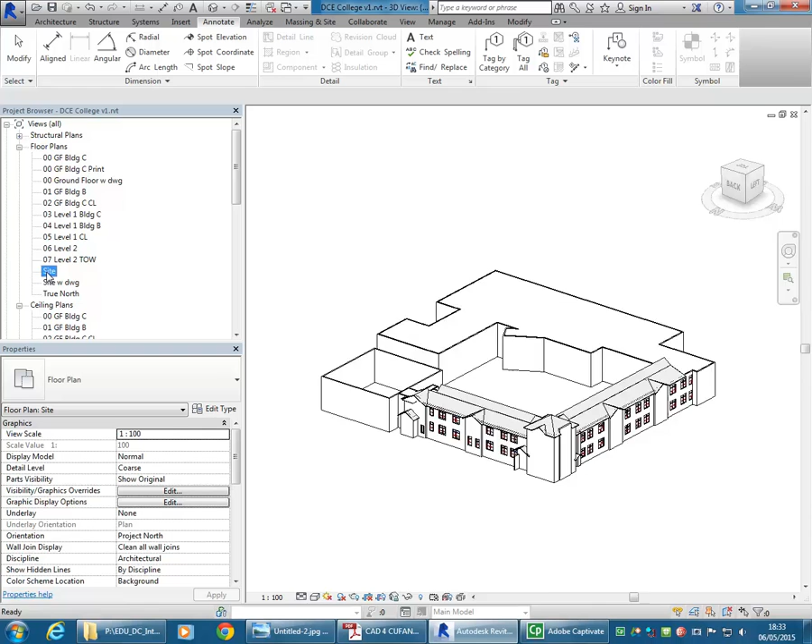So I'm just going to go quickly through a couple of things to finish off this view, like putting a topo surface in, and then I want to get into setting up the other views really quickly before getting on to more advanced things. So the building there, you can see, doesn't have a ground surface, so if you haven't done a topo surface for a while, I just want to go over the basics of using those.

It's fairly straightforward. Never used a topo surface? Okay, so that's all right. I'll cover all the main things. Yeah. Right. Yeah.

So you've got all the tools for site and topography on the massing and site tab. And then topo surface, it's actually a pretty easy one to use. Once you click on topo surface, you go into sketch mode, and it'll have this option, place point selected. If you click on something else, you just need to select that again to start creating your surfaces.

And I've inserted a drawing in here which can give me some idea of the streets, but I don't actually have the more detailed drawing, I don't think, which is fine, I don't need it. So I've just got some of the street elements at least shown there. So, like I was saying, place point is the main tool you use to create the surface. And for a project like this, it's an interiors project after all, so you don't need to do a detailed model of your site. And so, therefore, I'm going to leave the elevation there at 0.

And I'm just going to click 4 points around the building. 1, 2, 3, 4. Notice I'm in one of the site plans. If you're in a normal ground floor plan, you won't see those points always. It is coming up in some of them, but you can see in others it's not. So the best option there is to use a site plan, where you'll always see the points.

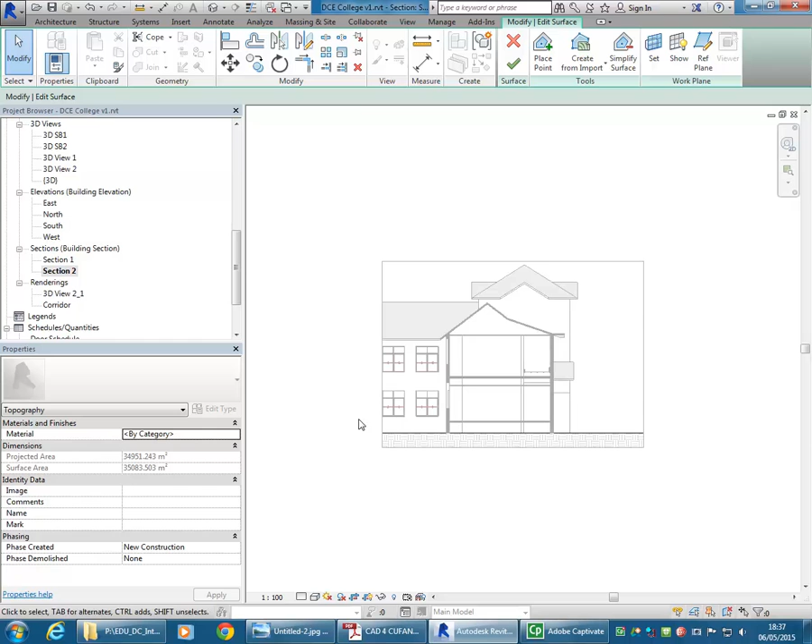So I'll show you that now in section. And because this isn't showing much of the site, I can just see a flat surface there. So I might go to an elevation there. The east or the west elevation should show me the slope pretty clearly. So we can see there these points that are higher. You can select them as well in a 3D view, but it's a little bit risky if you're not sure where your elevation view is coming from.

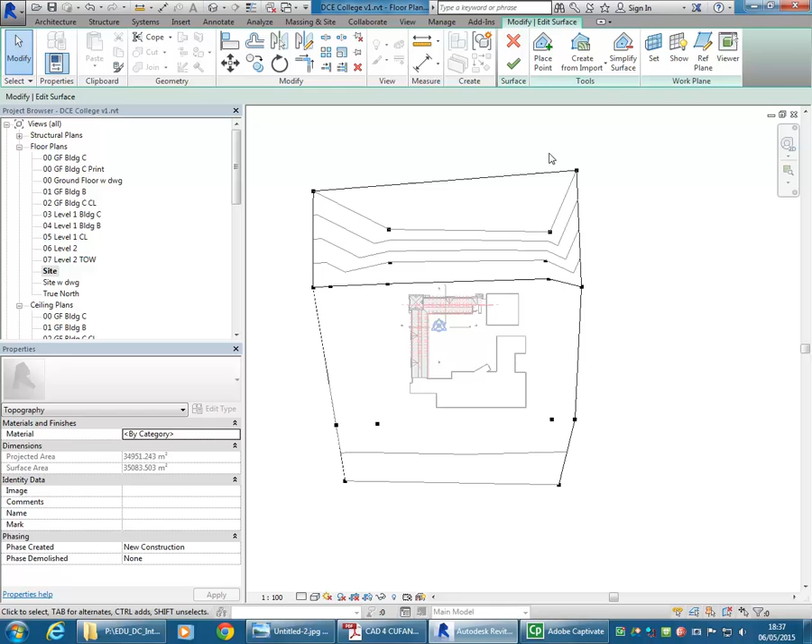So there my elevation is probably coming from about here, so it's cutting through that ground line, which is actually what I want. But I also want to move these points and make them a bit higher. So I'll finish that. And I'm going to quickly just make a new elevation view, which might be a new thing for some of you as well.

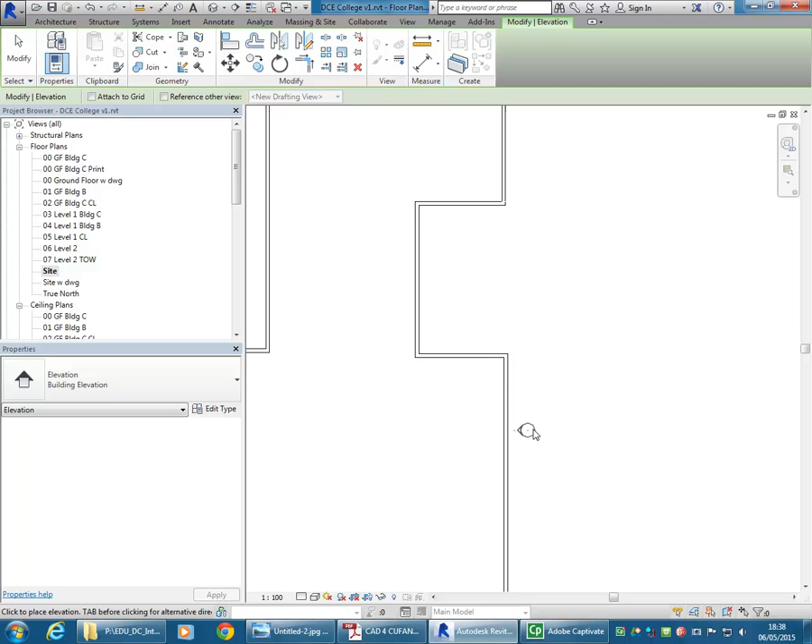On the view tab you've got elevation, and so there it's a bit hard to control the direction, it does it automatically. So it tries to point towards the walls that you've created. So I'm just going to place it off to the side here because I know it's going to point to the left.

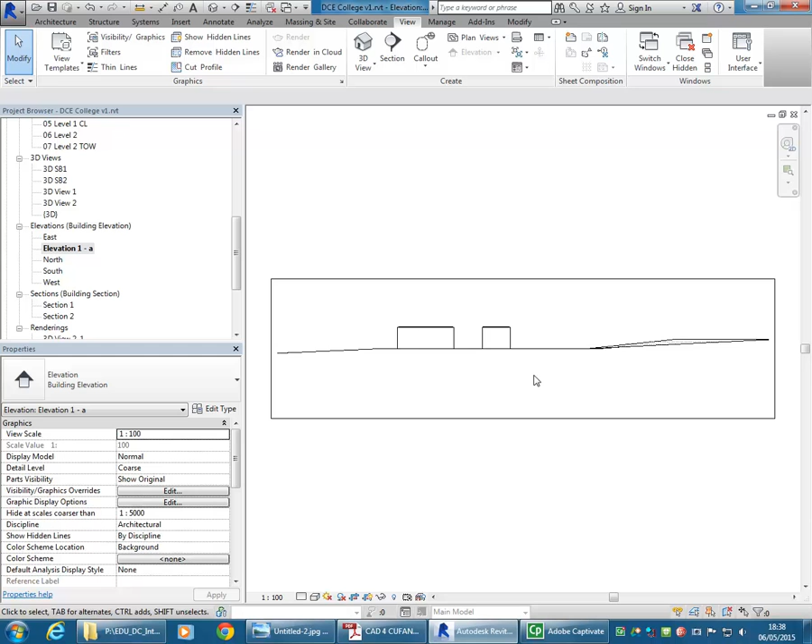And now I've got a new elevation view called Elevation 1 - a, where I can see the site from the side, or see the topo surface from the outside. I'll bring that crop region out a bit.

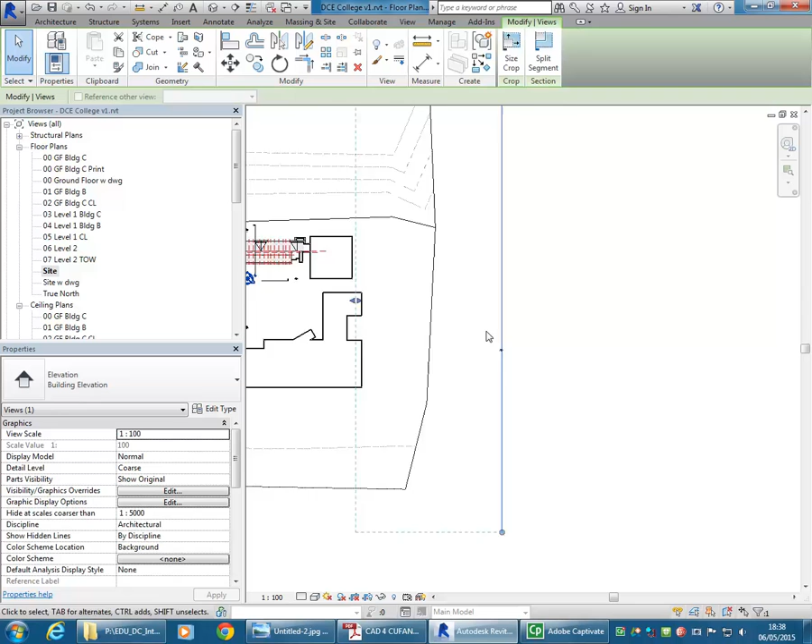And so then going back into my site plan, I'll just adjust that elevation view by selecting the arrowhead. You can see it was only showing a couple of those buildings or parts of the building because it's not going deep enough. So I'll stretch that so that it goes all the way across. Go to the view, and now I can see everything again.

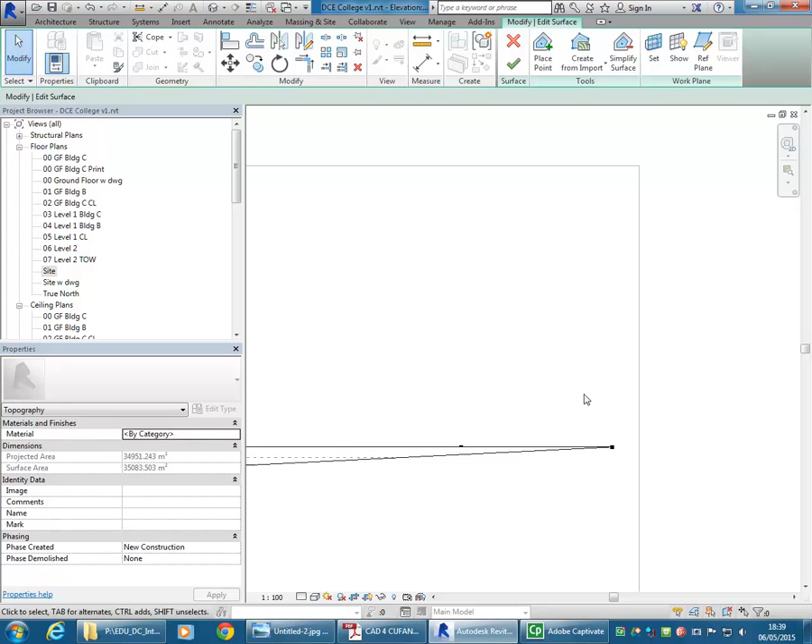And here I just want to select that topo surface, edit surface, and we can also select the points there and using the arrow keys lift them up. So you've got lots of ways of adjusting those points. And again, for a project like this, don't make it too complicated. It's an interiors project, and you're really doing that topo surface more than anything to get your nice ground line at the bottom of your views.

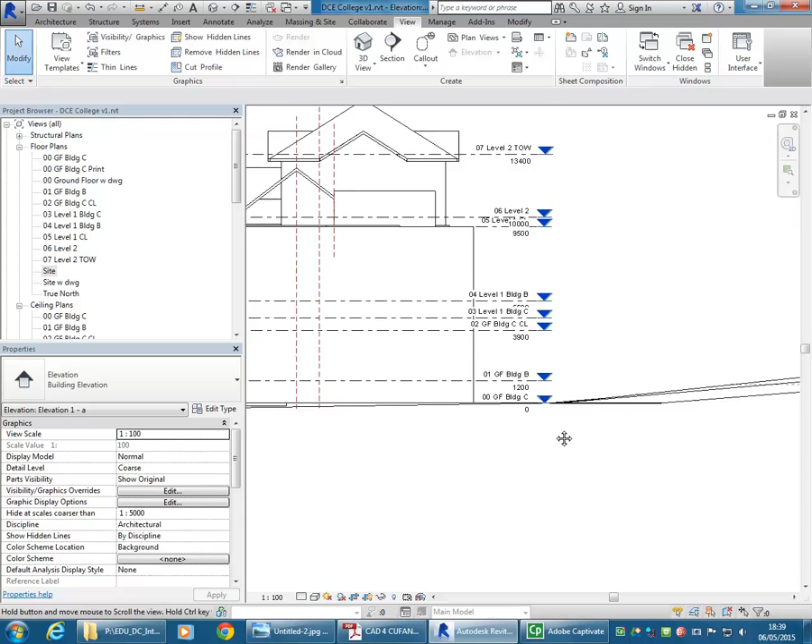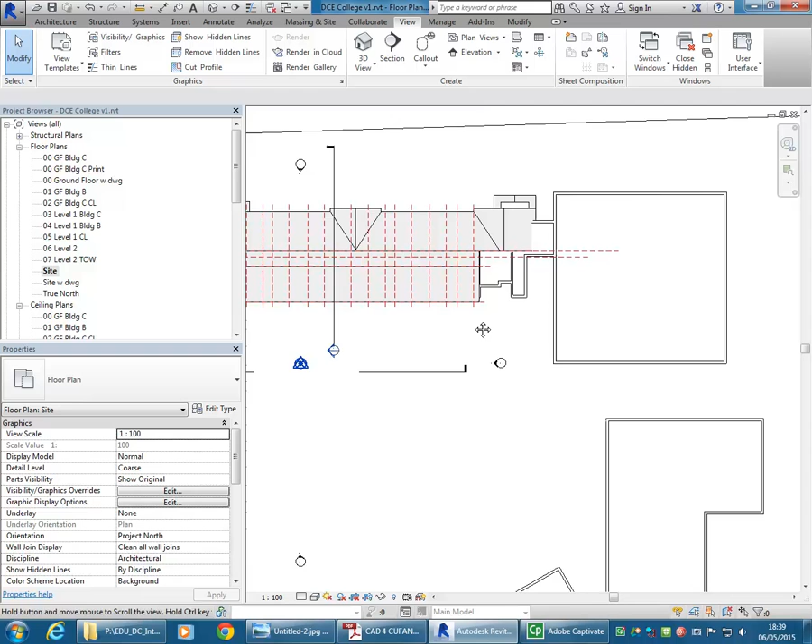So here, it's not giving me a ground line though. Well, it does in places, but mostly it's just a thin line. And that's because, again, this elevation is to one side of the building, to one side of the topo surface. Because I put the elevations where I want to show the parts that you're working on, so blocks B and C, and that's where it should be. I open that elevation. Because it's cutting through the topo surface, then I'll get a nice heavy ground line at the bottom.

So, elevation views don't always need to be cropped, but because you're just doing part of the building, you'll definitely want to crop it. So make sure you know about the cropping tools that you have available for any view in Revit. Down the bottom you've got the option to show and hide your crop region, and then the option next to that turns cropping on and off down on the view control bar.

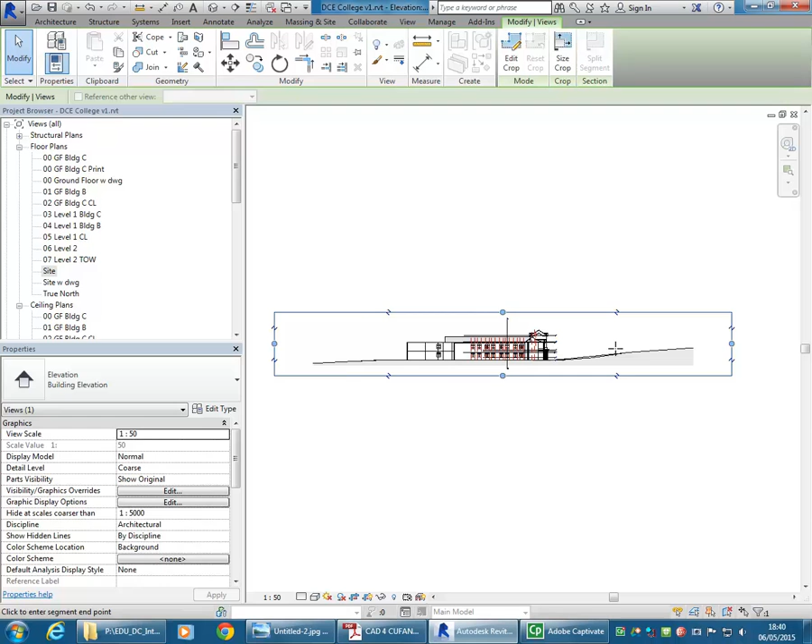So I'll bring the crop region in, just in case you haven't done much of this. And so there we don't need to show any of that part of block D. Bring this across as well.

And then just to maybe illustrate that second option there that turns the cropping on and off, that's a lot clearer now. You can see when you turn cropping on and off, it doesn't remove the crop region. And that's a really useful option. Sometimes you just want to disable it temporarily so you can access things that are outside the crop region. Then turn it back on to crop the view again.

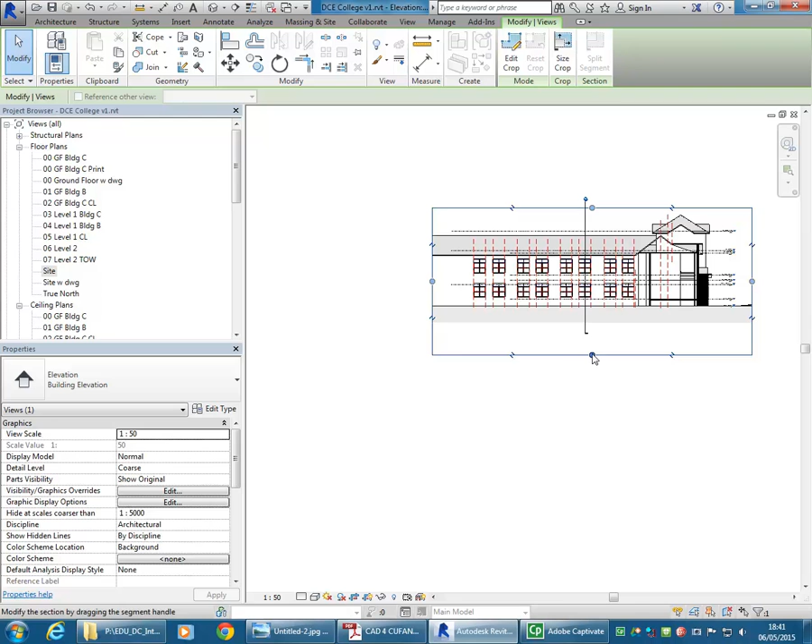And then you've got the option to hide the crop region, which again is really useful because you don't want to see that crop region usually once you're done with it. I'll hide the section view. It's good just to keep tidying your views up as you work in them.

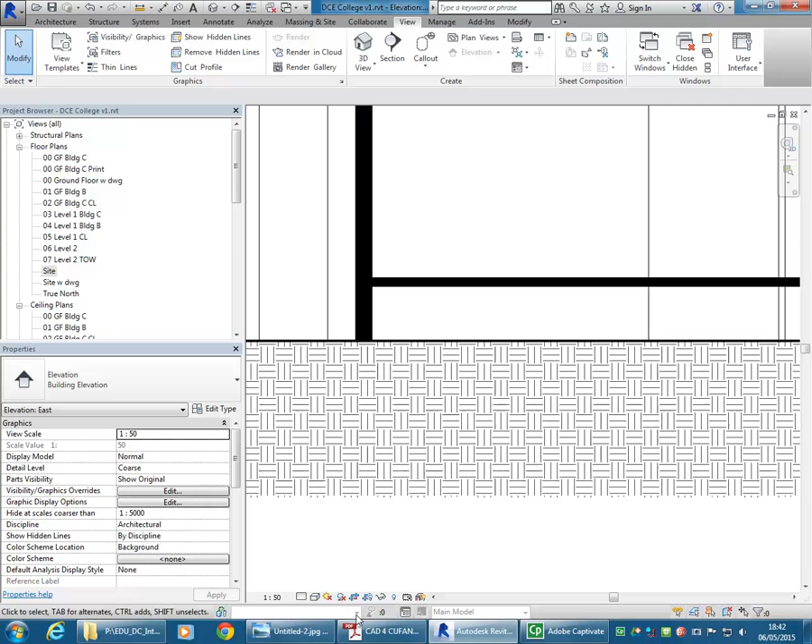And so even though you don't have to do elevations for this project, I just wanted to show you how to get the ground line to show properly in an elevation view. So I'll just bring that crop region over a little bit. So in your section, that's how you'd want the crop region, so the ground surface to show. Maybe with the cropping not quite so low, so coming up. Okay, but you'd want the ground hatch to show below your ground line to indicate that it's a section view.

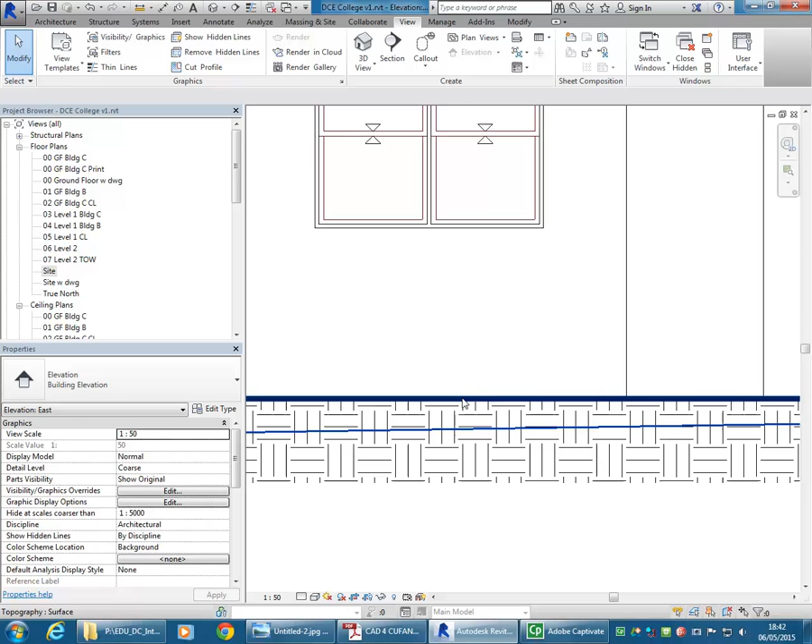But how do you show it in an elevation view? Do you show the ground hatch in an elevation view? Anyone? No, definitely not. That's right. It is sort of cutting it, but you don't want to indicate that it's been cut. So yeah, you definitely don't want to show it. And so you can use that same trick I was just showing you a little while ago. Select it, right-click, and then go to Override Graphics in View.

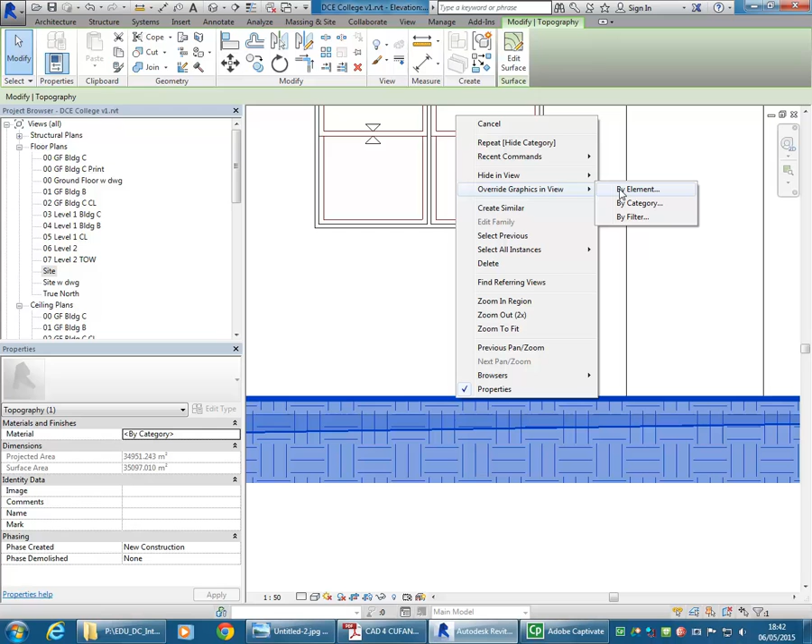And so, like I was saying, I encourage you to experiment with the options you have here to override graphics. I'm just going to show you a couple now, or one in particular. So choosing by element there. Now I'm going to go to cut pattern and just disable it. Okay, and there, that's got rid of the ground hatch.

So that's basically an elevation view, even though it is cutting through part of the building. There's not much we can do to avoid that, because otherwise you'd have to show the other building, which would hide the things you're trying to show.

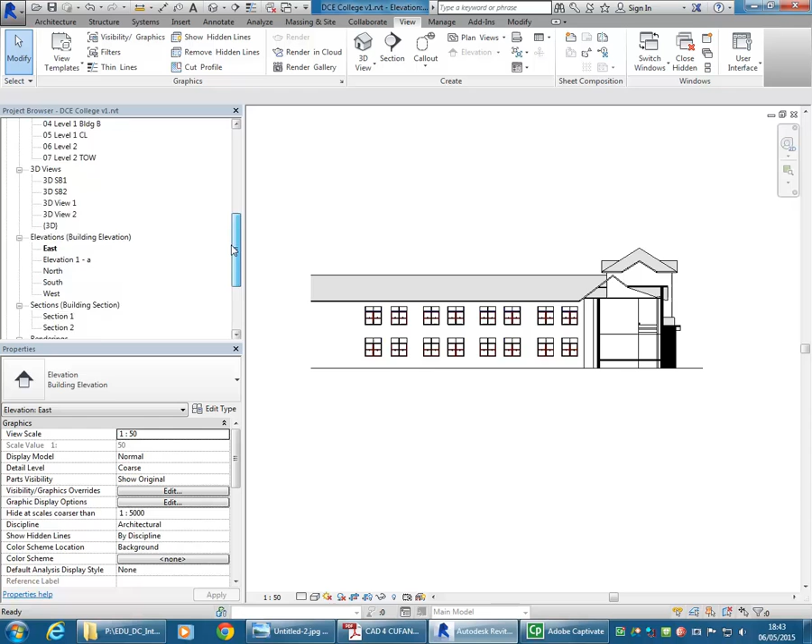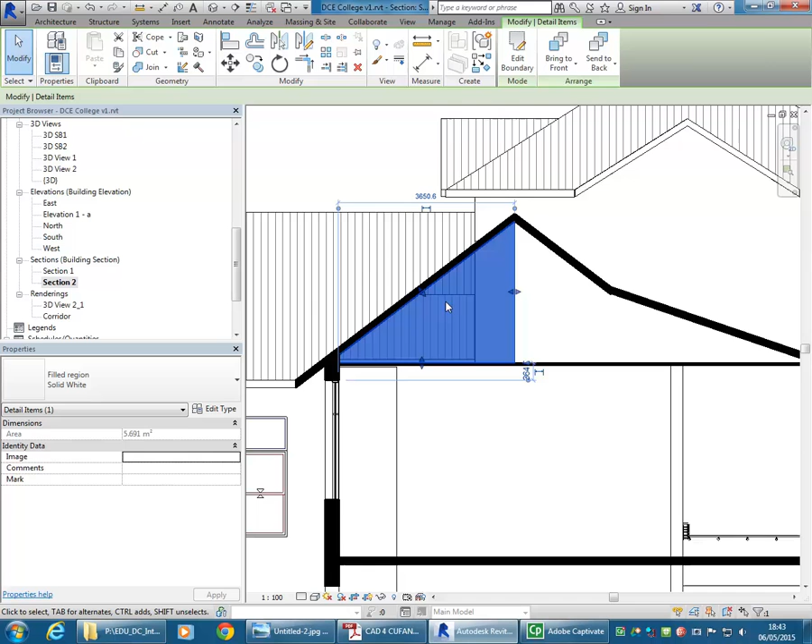So the section, on the other hand, so I'll use section 2, that's the one I want. I've already tidied that up, so I'm not going to go right into it now, but if you remember earlier I was just showing you, you can use things like filled regions if you've totally forgotten how to cover up things like the roof there, and then also detail lines to draw in anything that's missing from your drawing that you don't want to model in 3D.

And of course, don't forget about hiding things when they don't look right, and again, that's really helpful. That ceiling needs to be a bit higher.

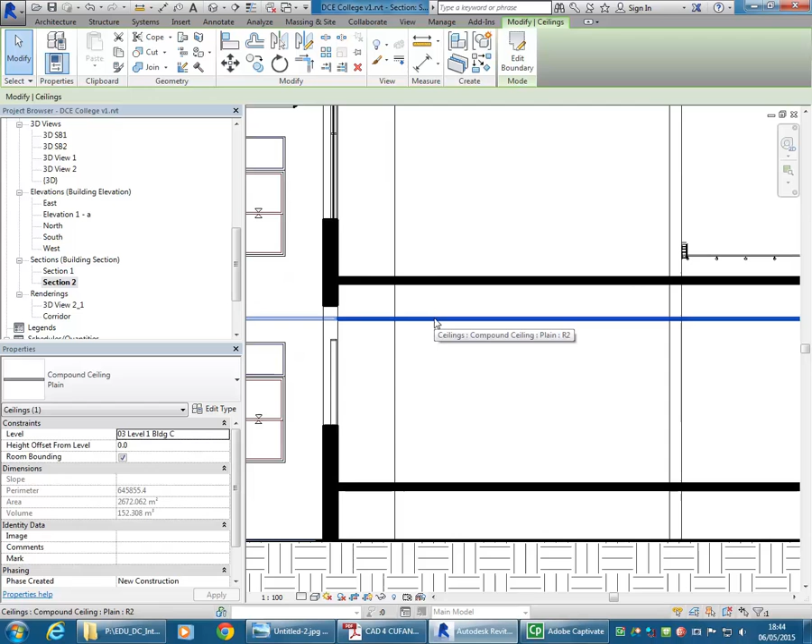And so then the section views and the plan views, like this one, are all that's required for the first project where you're showing the existing building. So floor plans of each level, so both levels, just one section. Basic labelling, so I'll maybe touch on that in a minute. Scale, and all of those views should be at a scale. I'm sure you all know by now, you set the scale in the view control bar, you've got the option there to choose a scale.

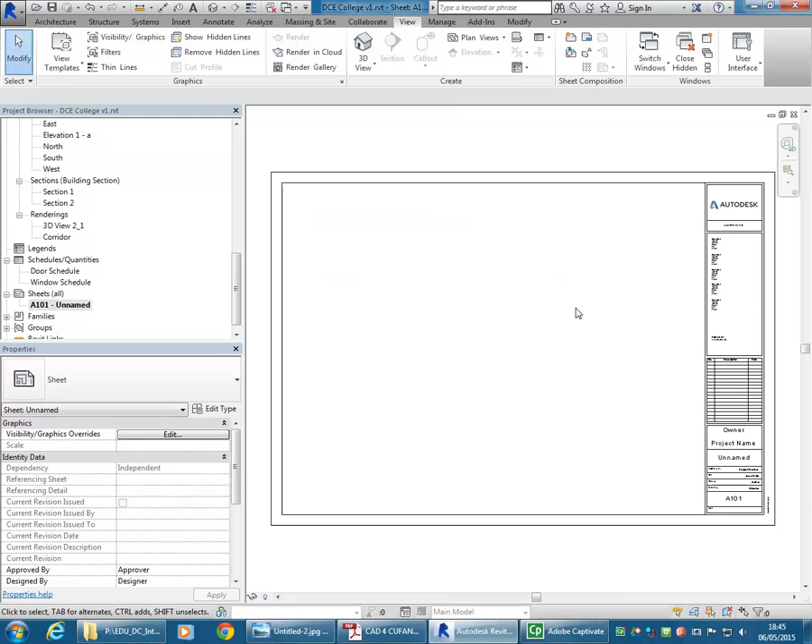So, looking at a sheet, you've got the built-in sheets that you'll have in any project that you start in Revit that have the horrible Autodesk logo. Well, it's not horrible, but you don't want to see that. So I'm going to delete that sheet, and I'm going to go and make a new sheet and use load to get a sheet from the library we have on the P drive. So does anyone not know how to get there? No? So I won't show you how to get there. It's the one on the P drive. If you haven't got a shortcut, just browse to it manually.

And there in the title blocks folder, if you haven't looked there, you've got really useful title blocks that I've made for you, like these blank pages. If you don't want a title block at all, they're really useful just to give you an idea of the paper size and how big your view is going to be on that particular page size. And that can be helpful if you then want to do the final setup of your pages in InDesign or Photoshop or Illustrator, because then you can establish the size of your views at different scales relative to a page size. So that's a useful option.

But I'm going to use one that has a title block, because you need to have that for this project, and it's fine for this project just to do them with Revit. So I didn't nominate a page size there. You can use any page size you like, and I didn't even nominate a scale. So you could do A3 if you really want to, but I'd probably go for a bigger page size. It'll give you more room to work with. And so A2 I think would be a good page size. So I've got A2 landscape below there.

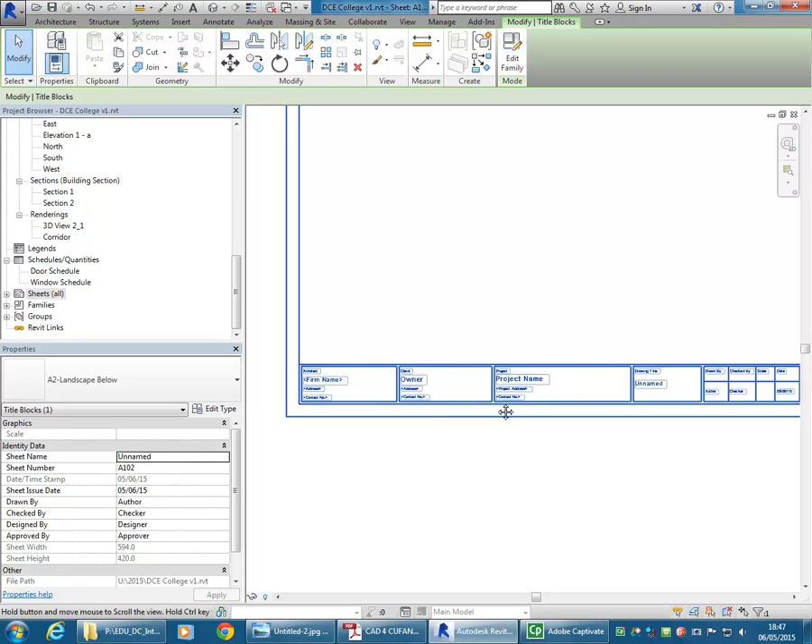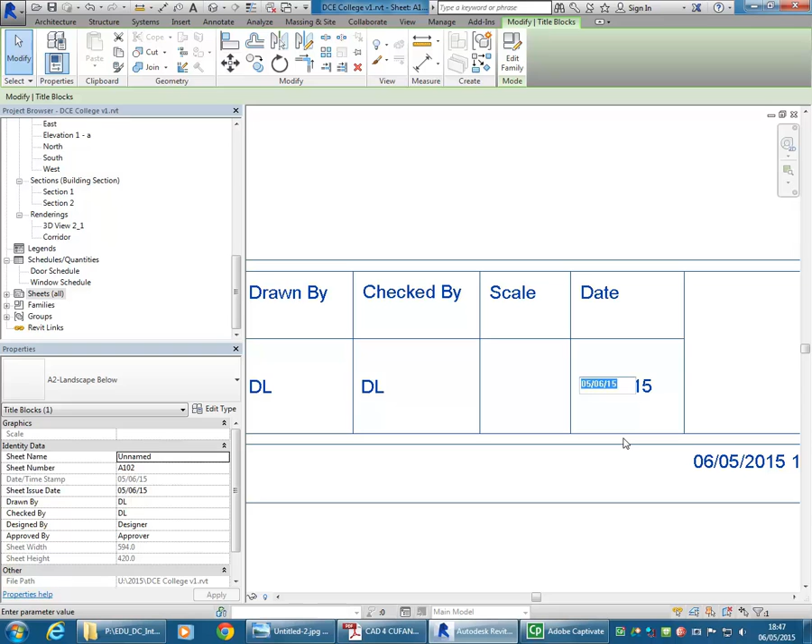And so if you haven't used title blocks very much in Revit, it's really down to the person who's made the title block, and you need to then experiment and see which fields the person who made it has made adjustable. So here I can adjust this drawn by field. Just put my initials, checked by, well that'll be me as well, and the date. This one isn't an automatic date, so you'd have to type it in, but it's come up with today's date anyway, so that's okay. And the page number is another adjustable one, so that's one that we can just type in.

But I know this title block, the drawing title as well is adjustable, so I might call this floor plans. The project name is also adjustable. So let's just put DCE block B and C. But then things like the project address and the contact number aren't adjustable with this particular title block.

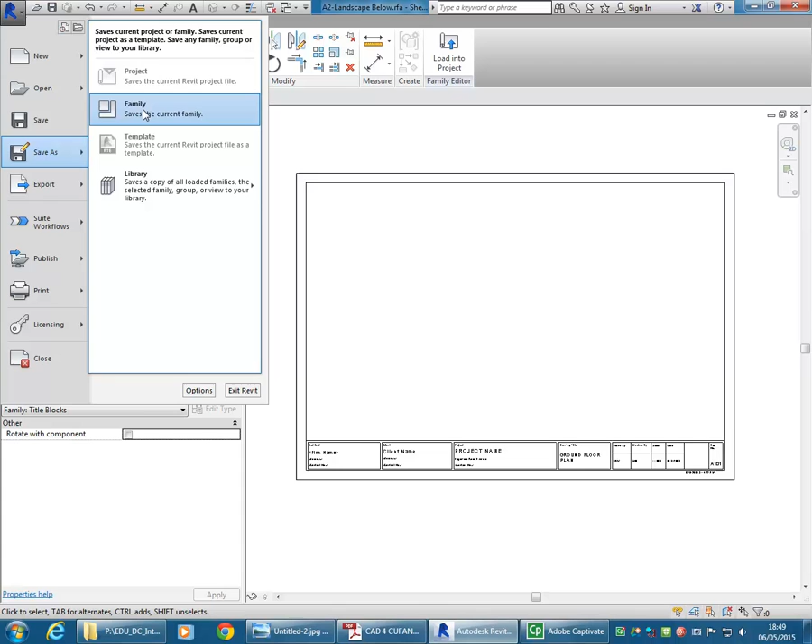So then if you make changes to this title block family, you'll need to save that as a new family. You don't have to give it a different name, you just need to save it into a different folder. It's a good trick to leave the same name so that when you load it back into your project, it's going to just give you the option to overwrite the existing version.

And there we go, it's changed my title block, and I can go and do the same to change all those other properties. And now I want to start putting the views onto these sheets. So I'm going to drag across my floor plan. Oh, there's nothing. No. So then you can see, as I was saying, how big this view is on that page size. And that's a really useful thing to have, obviously, when you're setting up your pages like we are now to finish the first project, but also when you start working on your design.

I'd actually do this before you've done very much design work at all, because then you have a good idea how the views can be set out as you're doing your design, which is going to give you a good idea how much you need to draw. And you'll see when we go and do the perspectives, that's extremely useful. So I've deleted that view because it was too big. You can resize it on the page, but a really good tip I can give you there is to do as much as you can in the view before you put it on the page.

So there, I've changed it to 1 to 200. Notice that the section lines disappeared. Anyone got any idea why that's happening when I change the scale? Something you might have noticed if you've ever gone to 1 to 200. So it's one of those not very well known options actually with sections. They have an option in the section itself. So if you select a section, you'll see it's got the option to hide at scales coarser than. So there it's going to hide at scales coarser than 1 to 100.

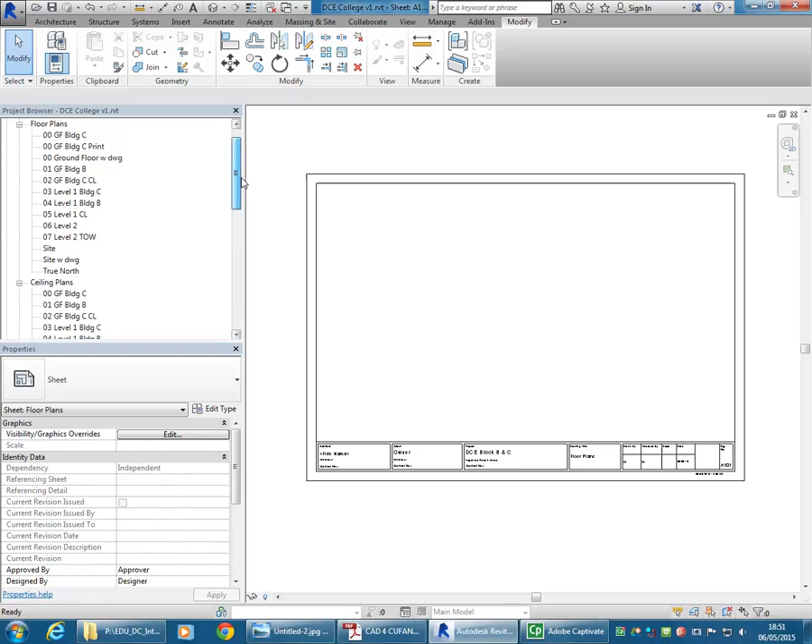Now I want to see it at 1 to 200, so I'm going to change that to hide at scales coarser than 1 to 200. Now if I change the scale to 1 to 200, it won't hide that section. It's hidden the other one, and that's good because I don't want the other one. So then in the page, or the sheet, I can now drag that on and it will easily fit. And notice it's resized the label to suit.

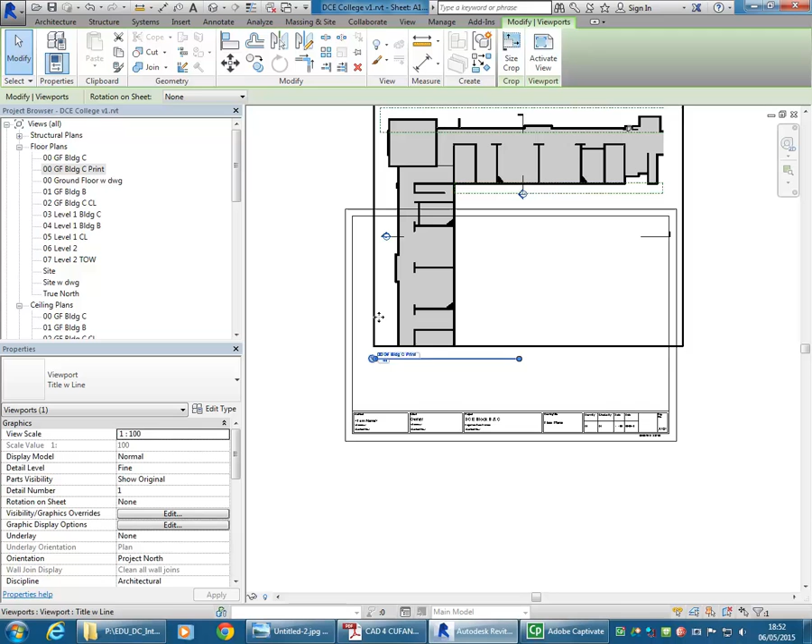Whereas if I'd done it the other way, if I changed the scale on the page, the view changes size. So I'm just looking at A2. Yeah. And so notice it changes the scale of the drawing or the view, but the tag would need to be resized manually. So that's just a simple thing you can do to get your tags automatically the right size.

So what was that? Oh yes, of course. Yeah, absolutely. So I'll show you that. So if you select the title block on the sheet, and then go to Edit Type, then you can go to Load, and load a different title block that way. So you can load in a new page size, and it's best to have the page sizes already set up in families. So yeah, that's the best way to change it, because it gets the print size from the title block size.

Yep. Yeah. So then you'd have to select it and then use that same option, go to Edit Type, and then you'll have it in the list here of title block families to choose from. So because I've got this A0 page, I can just switch to that straight away.

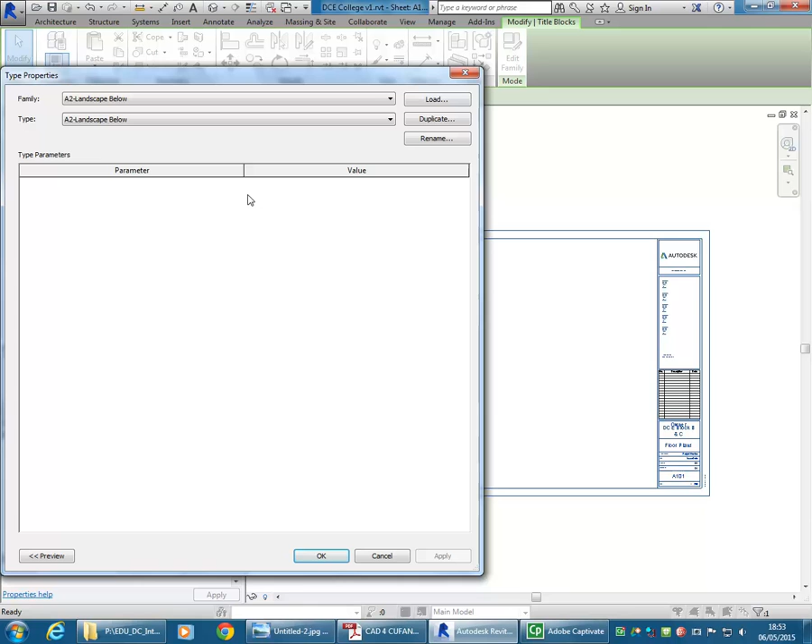Right, I can try, but they've changed the proxy, the way that we access the internet in here. It goes via a server, and it's causing all sorts of problems with things other than just standard browsing. So I'll have a look at it later and see if there's a way. Because I've made it work because I use Dropbox too, but I know it's a bit fiddly.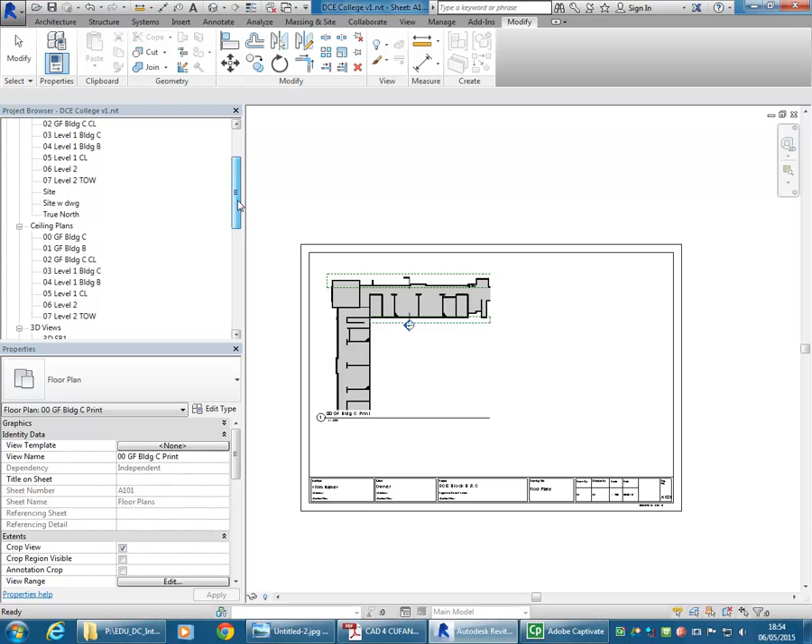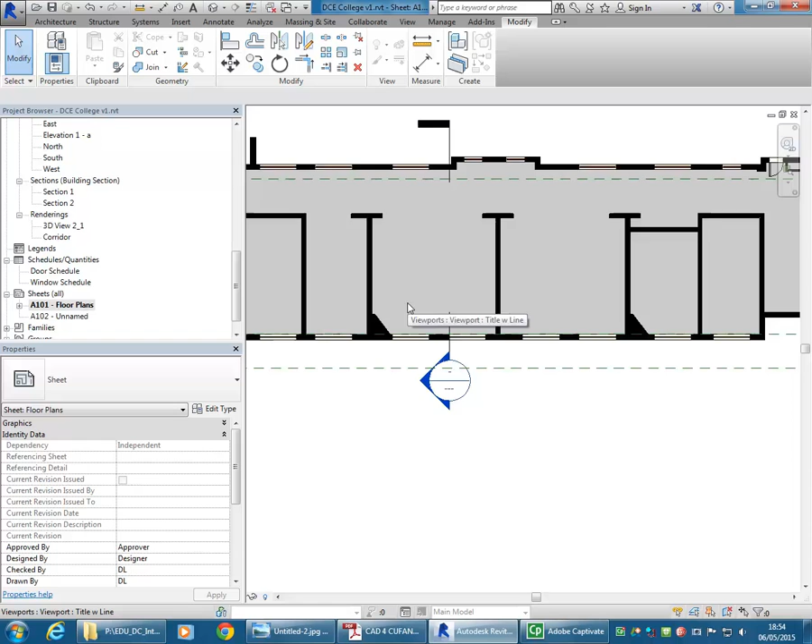Okay, so you should be able to fit both floor plans on there. So I'll make a new sheet. Okay, so I just wanted to remind you there with the section view, how you get the referencing. So I might just delete that just to illustrate what's happened there. So if you've seen in your section labels that it just has these dashes and you've wanted to change those to a set of numbers to reference the views,

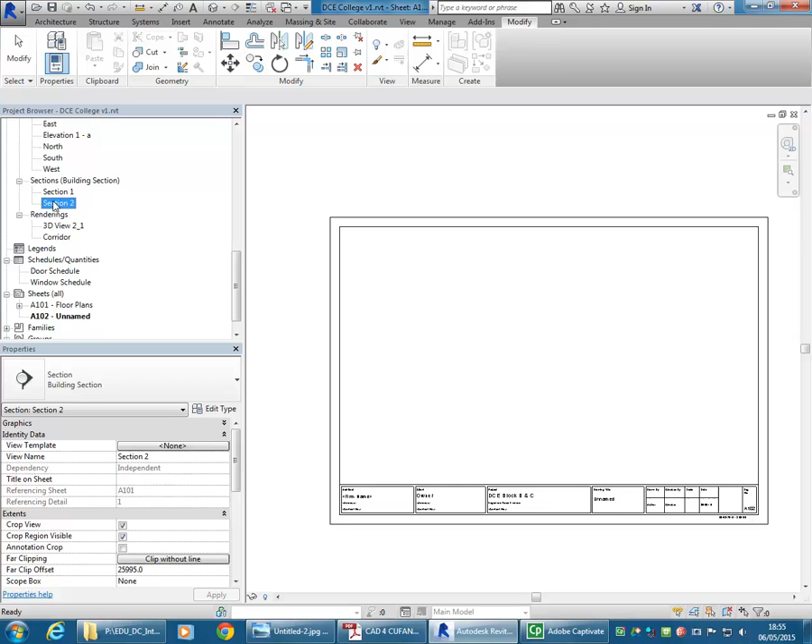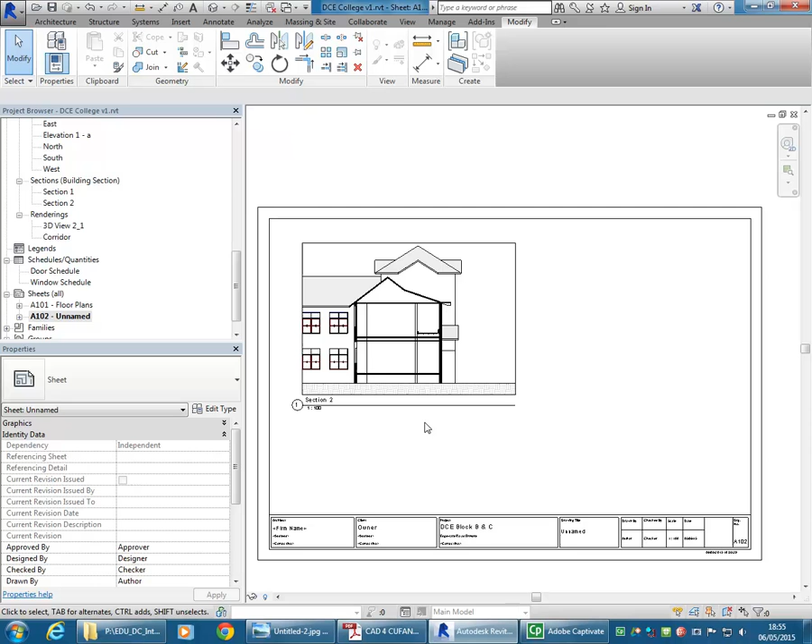notice when you put the view that it's referencing onto a sheet, so this is section 2, then if I go back to look at the floor plan now, it's automatically got the referencing there. Okay, so that's something that can trip you up, but if you know about referencing, it's much easier than doing it manually, and Revit will automatically update the references. So if this changes to view number 2 on the page, automatically back on the floor plan, that's going to update.

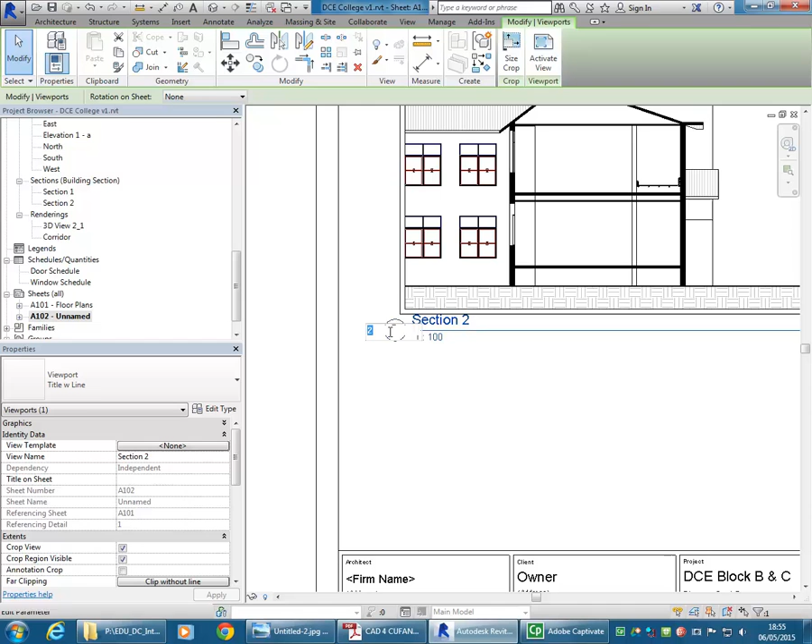Yeah, exactly, and then you can just change that number there. So I'll change it back to 1, and then that's changed. Okay, so just a couple of other things maybe with viewports. When you select a viewport, you can easily move them around, and it moves the tag with it. It is, yeah. Well, it's just getting used to selecting them separately, yeah, because... Yeah, you have to move the whole thing to move the label.

That's right. So to move the whole viewport or to change the size of that tag, you select the viewport. But then to just move the label, you've got to deselect everything and then click on just the label, and you can move it separately. So make sure you're aware of that, and it works pretty well. Sorry? Yes. Yeah.

Yeah. So, well, the best option is to set the viewport to no title in properties, and we'll just turn that off altogether. Okay. So that's a bit tricky. What you'd have to do is make your own title tag. That's a family, and you can do that. They're in the annotation folder. You'll see you can easily make your own, but it's a bit technical. And so probably an easier option is just to set it to no title, and then just draw on with text on the Annotate tab. You can use the text tool and just draw in the text you want.

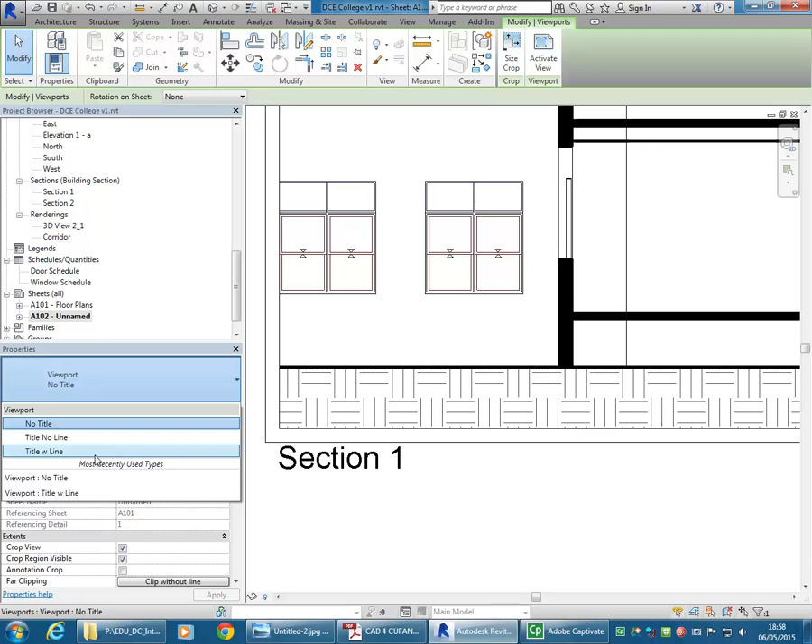So we want that to be bigger text, obviously. And, sorry, let's do that again. So that's sometimes quicker and easier than trying to make a new tag. Such a fiddly thing though. Yeah. Because, like I said, you can definitely make your own tags, but it's a bit more technical than making other families. But I'll delete that and go back to having it.

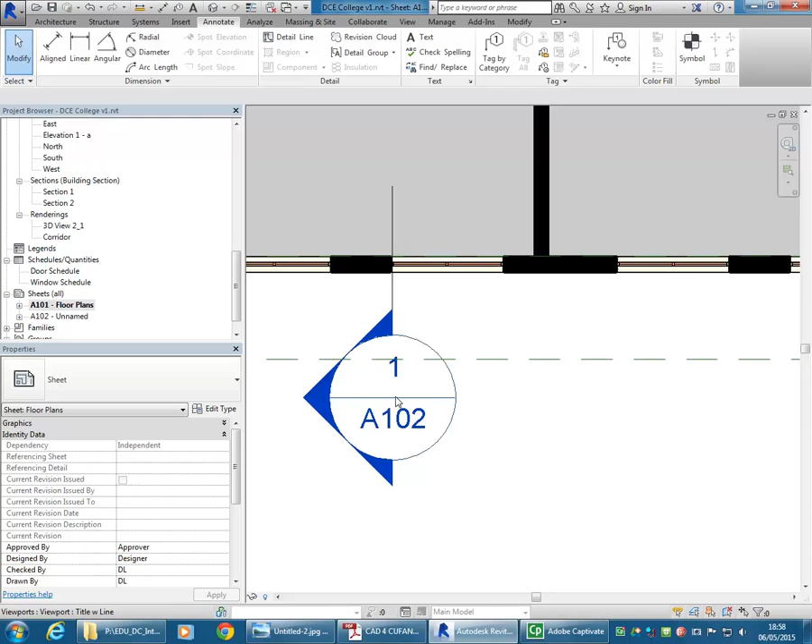So the main thing I really wanted to point out there is the way you're getting that size. And just remind you, it's using the scale to give you the size of the orthographic or the orthogonal views. So plans, sections, elevations, and also, even though you don't need to do them for this project, axonometric views. So you definitely by this stage would have done a lot of axonometric views, I'd be assuming. So 3D views that aren't in perspective.

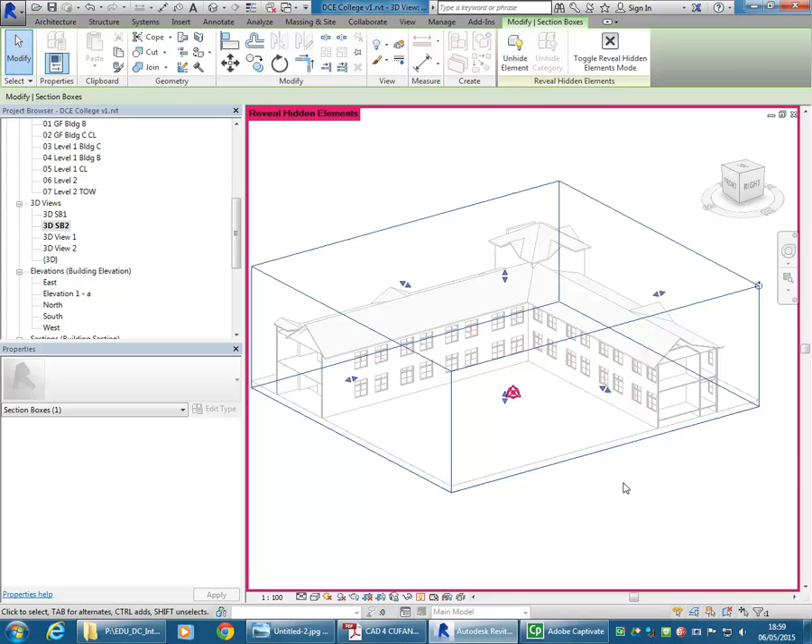Yeah, we've got to do them. Yeah, you would have drawn them even by hand, I'm sure. Yeah, they're actually the way I design by hand. I do all my hand drawing in axo. That's just the way I was taught to draw, so I'm just used to doing it that way. It's much easier than drawing perspectives to do design work, I find. If your plan isn't going to give you enough, they're pretty good.

And the great thing about Revit is that it does axonometrics automatically. Everything's an axonometric if it's not a perspective. So it's always got a vertical axis. And so the main idea there is that the axis in Revit is always vertical, which means it's an axonometric view, not an isometric view. But you'll see, even in the next assignment brief, I've called them isometric views because that's the term you're probably more familiar with. And do you know what an isometric view is? Because you need to do it for the next project.

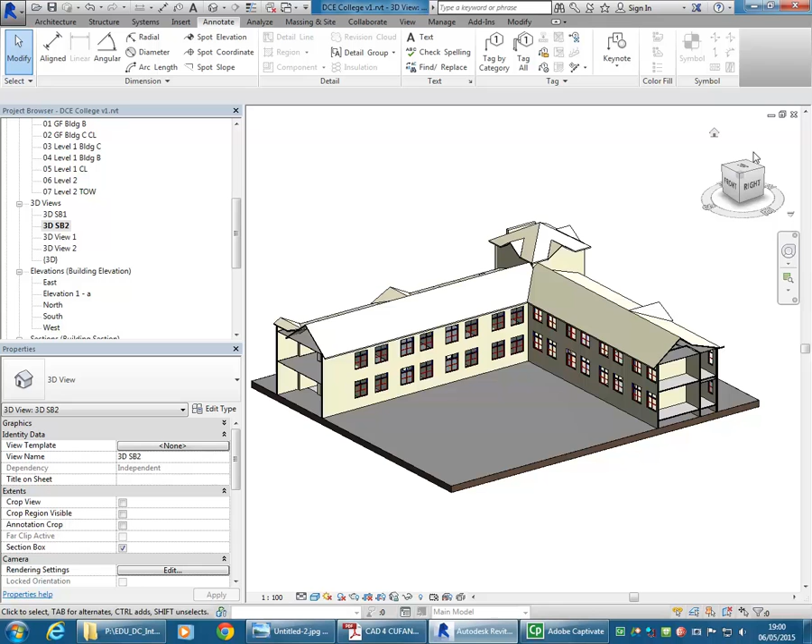Oh, I always get these. Yeah, everyone does. But it's easy if you remember what the original words mean. So iso in, I think, ancient Greek means equal. And so in an isosceles triangle, you have two equal angles. And you'll see that term come up like ortho. Ortho basically means at right angles. And so that's a true isometric view there when you click on the corners of your cube, because you have equal angles between the top, front and right sides there. So that's a nice thing again that Revit does for you.

If you want the other one where it's got 45s as opposed to 30-60. Do you use those angles 30-60 to do your isos? No? Oh, you don't do much hand drawing probably for this. Yeah, so well, they're making the first years do it now. It's coming back. A lot of it's really coming back. So it's worth looking at this stuff. Collage, watercolor, all that old stuff is really making a big comeback. And you're expected to do that as well as the computing stuff nowadays.

But I know you are lucky you just are allowed to do computing stuff for... Well, yeah, I know, that's right. Exactly. And it's the same, I mean, the uni I'm going to, they're manual drawing people, so they're making us do everything by hand, even people who can use computers. That's right, exactly. And I know he's going to be doing a lot of the design subjects from now on, so it's good to look at that.

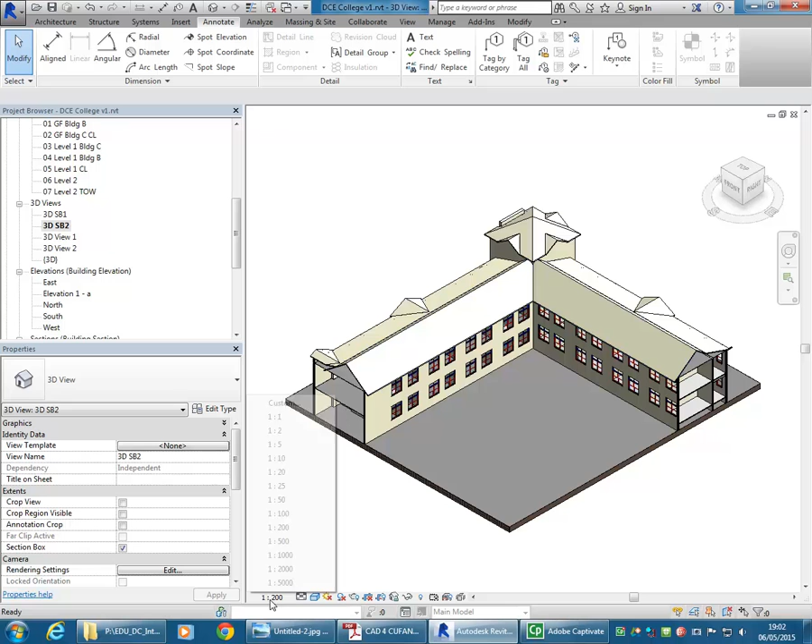So going down to my sheet now, I can place the view that I just had open, which was section box 2, onto the sheet, and I know how big it's going to be because I've set that scale 1 to 200 in advance. And it will just make it there with the section.

And then maybe just a little thing I can show you before I go into perspective views is that you can work on the sheet.

And do most of you still use AutoCAD? Yeah. Right, yeah. AutoCAD's still a great tool. I use it almost every day along with Revit. So don't forget to use AutoCAD. And for getting work, it's still probably the main program they want you to use. But Revit's a great skill as well. They're really looking for Revit people because a lot of offices are switching over and struggling to make the switch.

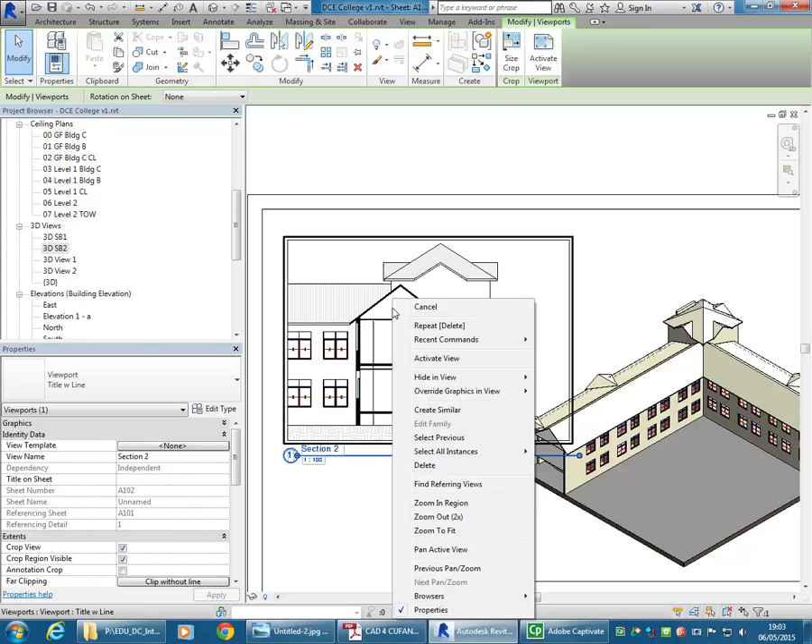So what I wanted to show you there is, if you're wondering about the option of drawing in paper space in AutoCAD and whether you can do that in Revit, you can. Select a viewport, right click and activate view, or use the option up there on the ribbon, same thing, activate view, and then it's just like switching from paper space to model space on a layout in AutoCAD. So there I can adjust that crop region.

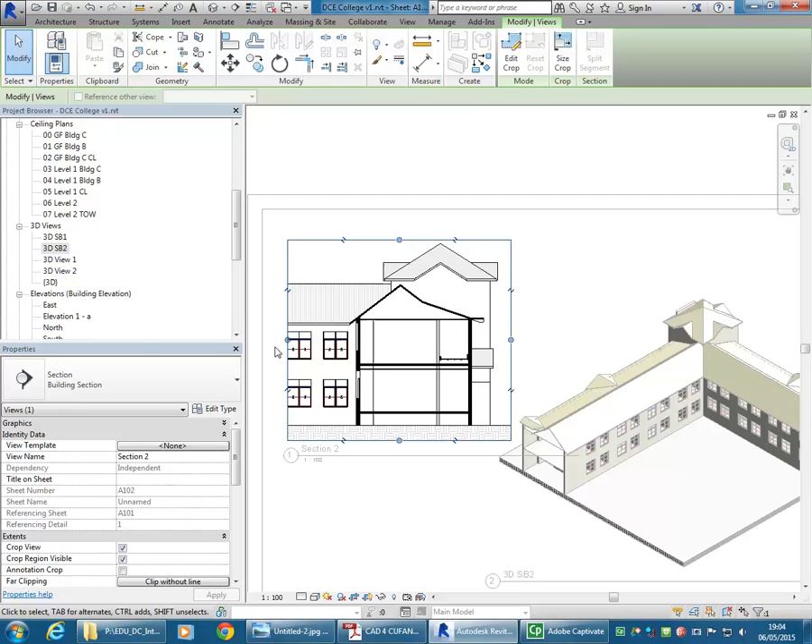So that's a really useful option as well when you want to work on a page, and obviously here it's helpful to position that in relation to the other things I have on the page. And now again I can right click and deactivate view. I'll save it. And I'm back to the page, and it's now like I'm working in paper space, and I can bring that tag over and do those other things.

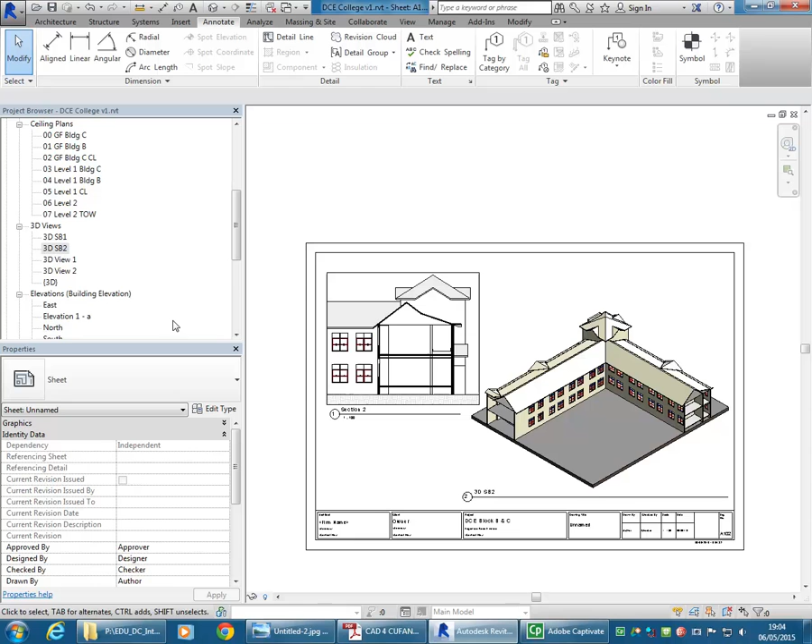So I've got a couple of views there that are at scale, but now maybe I want to have some views that are in perspective. And so the main difference there is that, well, I'll ask you, the size is set differently. So can you set a scale for perspective views? Yeah, well, you can set a size, but can you set a scale in the same way as a floor plan? No, you can't set a uniform scale, and that's the basic principle.

So sometimes there's a bit of an error in Revit, and it'll let you click on this perspective label and choose a scale, but it doesn't do anything except change the line weights. Because you can't have a uniform scale. Things in the foreground in a perspective view are always bigger than things in the background. It's obviously the same window here, but it's bigger here than it is in the background because it's perspective. So, how do you set the size for a perspective view?

Yeah, when you're on the sheet. Oh, sorry. But in here. I just select it and then the crop, that's right. Yeah, the crop region. So you click on the crop border there, and then you get size crop. Click there, and then you have this option to set a width and a height. Now, if I change the height, let's say to 100.

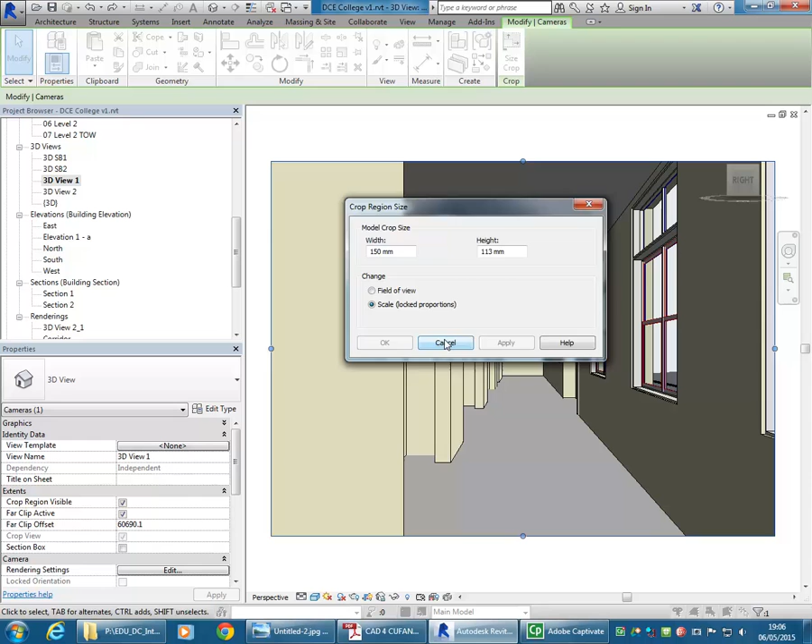So I'm going to cancel this and go to my sheet, and I'll put that view on. So it was 3D view 1. So I'll drag that onto the sheet, and now I want to make it bigger without changing what's showing inside that crop region. So notice when you select it on the sheet, you get the same option there, size crop.

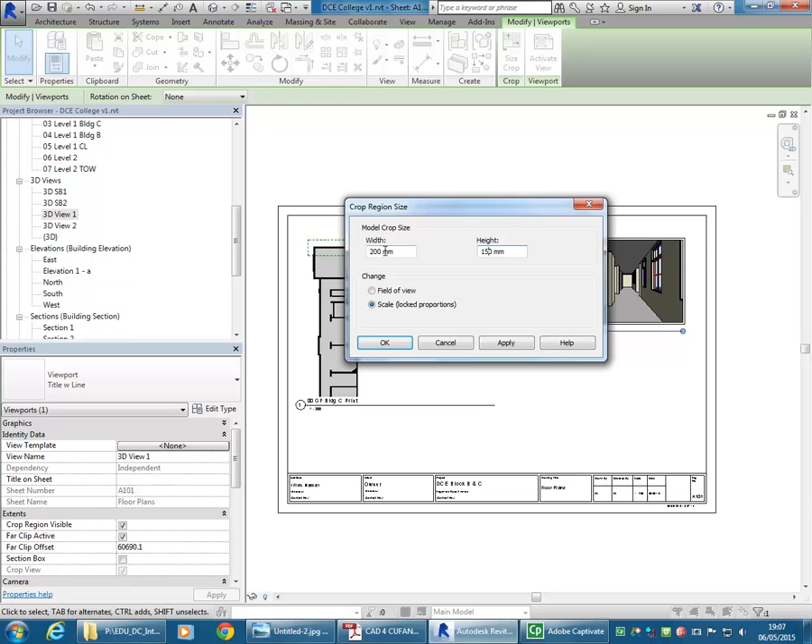And then straight to scale lock proportions, and this time I'm going to make the height bigger. I'll make it 150. I'm going to click across to the width, and notice it automatically is going to change that. So it's got the proportions locked. In other words, if you change one, the other's going to change in proportion. Click OK, and it's just changing the size of the view on the sheet effectively.

Now again here, I could select that tag and move it and stretch it, but remember that little trick I showed you? You can just delete it from the sheet, drag it on again, and it redoes that for you automatically. Oops.

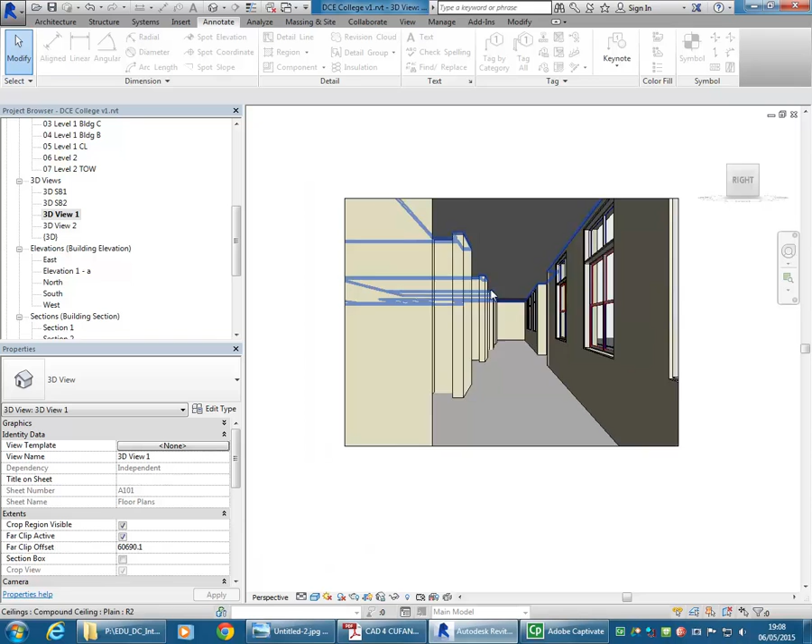Okay, so exactly the same principles apply with rendering. And it really does tie into rendering on a deeper level as well. So I've just opened that view up again so I can show you the render dialog box. I think I've shown you this before, but I just wanted to remind you, if you've wondered how it gets this size here in pixels, and this is the reason I was talking about the presentation subjects before,

because with Jane you would have done resolutions for different sheet sizes and your print resolution. So do you know what print resolution is, or should be? Exactly, yes. 300 these days is standard. You don't want to do anything less than 300 nowadays.

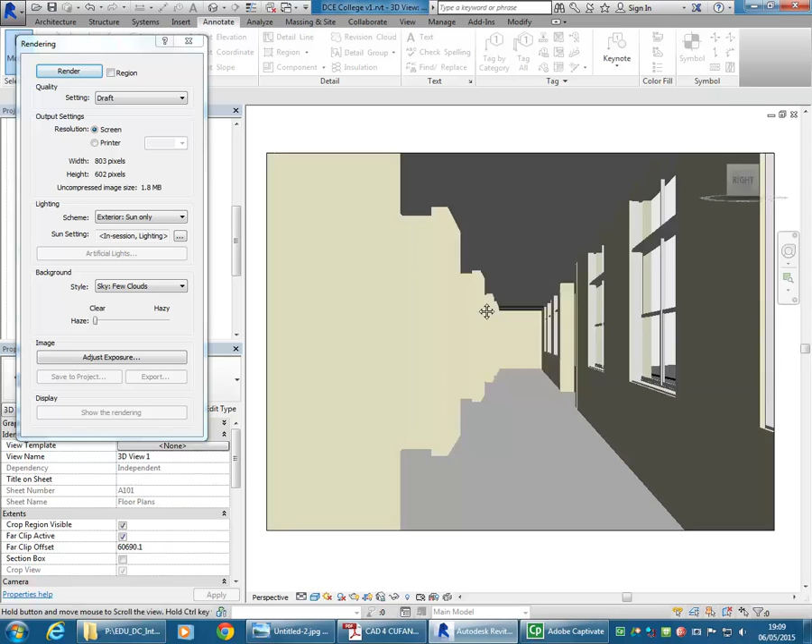So with screen selected, you don't have any control really over these numbers. You've got a bit of control, but not much exact control, because, like it says, it's the screen resolution. So if I zoom now, notice these numbers change. It's using the pixels I can see on my monitor to give us that width and height. So as I zoom in and out, I have more pixels inside that border.

Instead, if you go to printer, then notice it uses the width and the height that you set with size crop. So that's a really useful option also for rendering, because it determines your final resolution. And so like I was mentioning before, if you start thinking about this as you're doing your designs, renders for big expansive areas, in advance you can set up on your sheet and get an idea how big that render is going to be, and then work out how many pixels you're going to need when you do your final renders.

Renders of more detailed parts of your design that maybe don't need to be so big, you can set up in advance to have a small width and height, and then you'll need less pixels. And you can also start to think about the level of detail you're going to show for the elements you design and how many pixels you're going to need to show those things.

Exactly. And so if I do that now, it's going up to a big pixel count. Anything over 2000, it's going to take a while to render. But if I go back to 150, for test renders, that's fine. And I can still set that up on the sheet and get a good idea how it's going to look. So going back to 75 even. That's really a small pixel count now, but that's good because it'll render quickly. So I'll just render that on draft, and it's going to take next to no time. I'll save that one and I'll come back and I'll redo the sun.

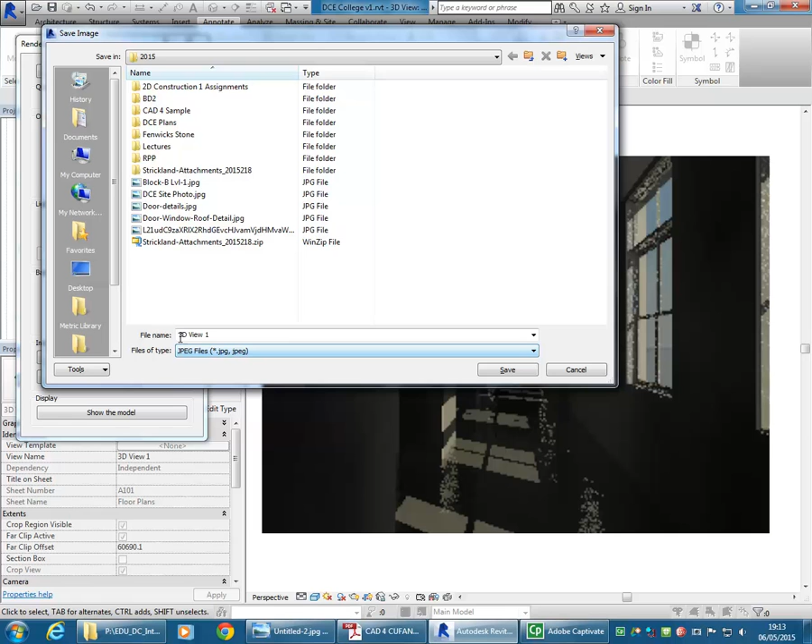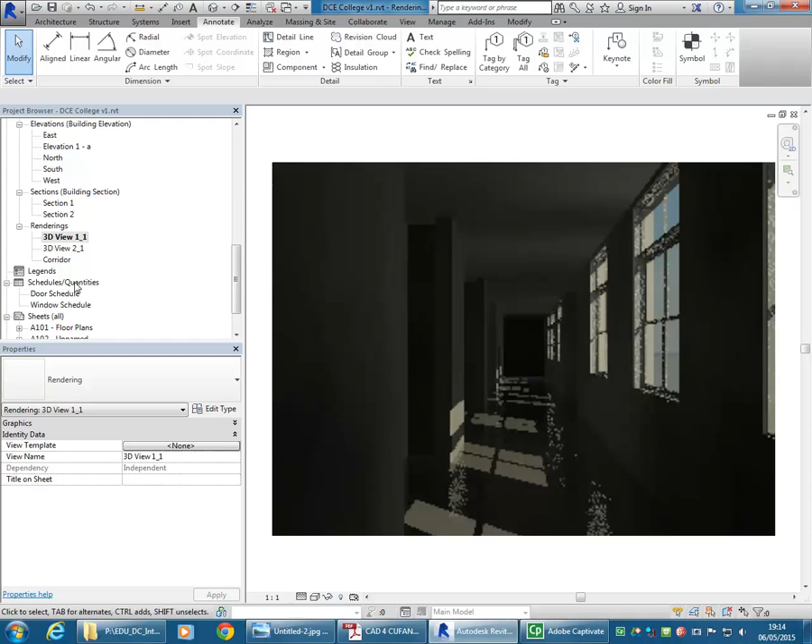So always, when you want to keep a render that you're happy with, export it so you can access it outside of Revit. But for quick things that you just do within Revit, save to project is good enough. And so if I go down now into the project browser, you'll see I've got a rendering section where it's placing these renderings that I've done. So these are some others that I did earlier that took a bit longer with that same space.

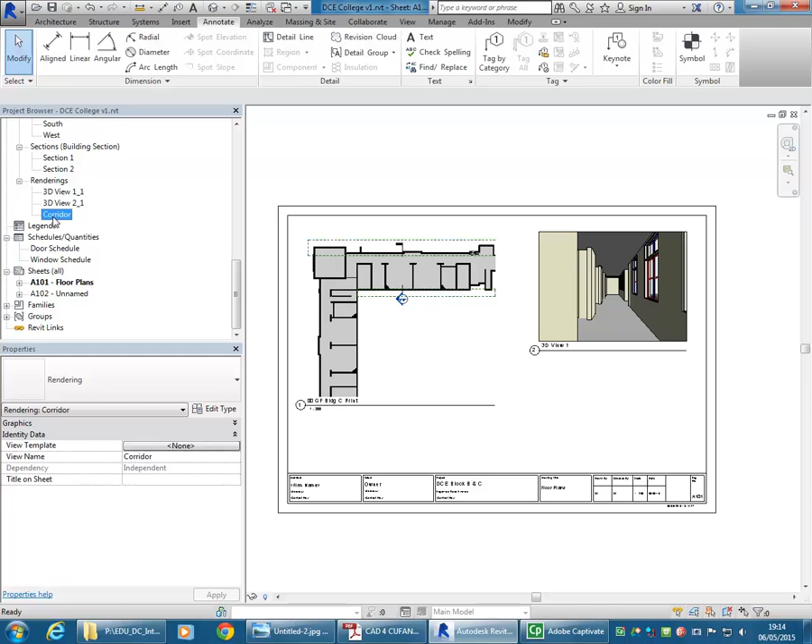And I'll put those onto a sheet. So if I go and place one of those onto a sheet now, the size is set in a similar way to the perspective view above. You set it in millimetres, but you access it in a different way. Unfortunately, being Revit, of course, they like to make things different. So I'll actually just make this one a bit smaller.

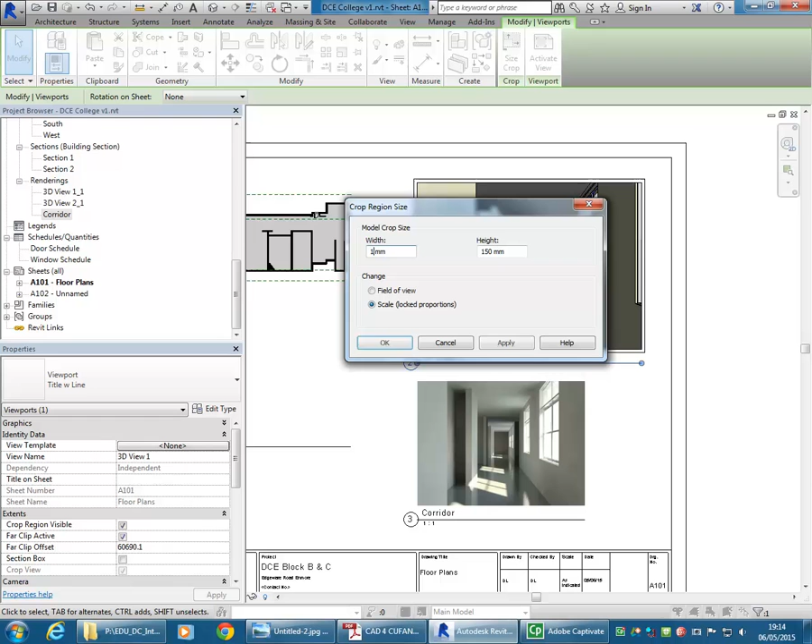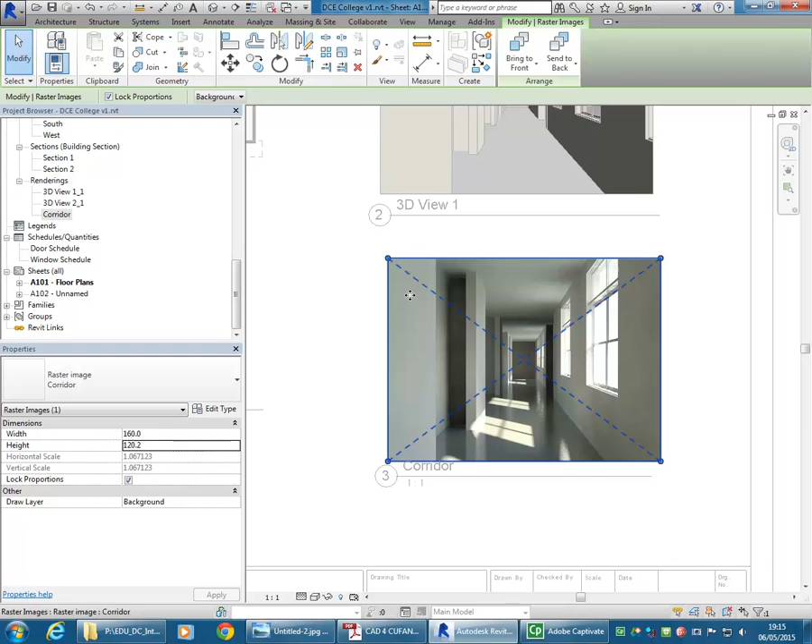So to change the size of this view, you need to activate the view, and then you can select the image, and then you'll get the width and height down below. So the width there, if I make that 160, notice it's got the option to lock proportions there, so it will change the height in proportion automatically, and now it's the same width as the one above. Okay, so the only way is to activate the view, in other words.

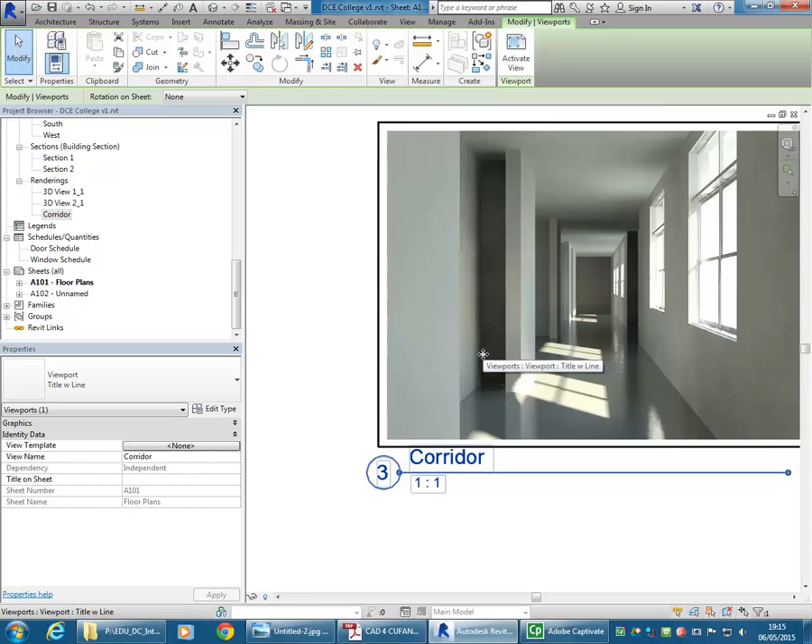And also, unfortunately, there's an error with this tag. It puts the scale in. And so the only way really of taking that off is to change the tag. Yeah, it's not a simple thing. I'm going to show you that later. So what I do for now is just set it to no title and then manually draw some text on. Oh yeah, so that's it. Just remember, activate the view and then select it again, and you'll get the width and the height and properties on the left, or wherever you've got properties.

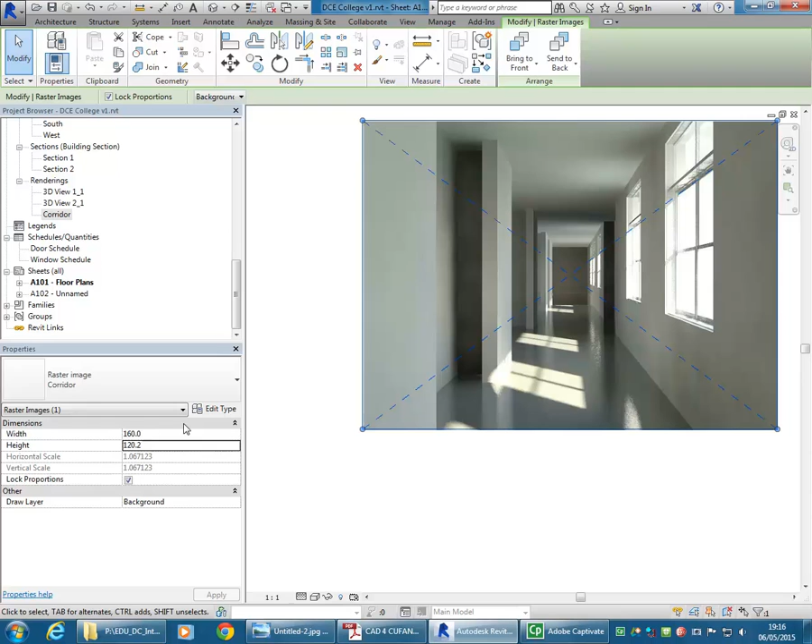So the very final thing is just to give you a quick refresher on setting your sun. So I'll quickly just show you the plan and get you thinking about the sun a bit. Which way's north in this building, in relation to the building? Yep. That way? Yeah, that way. So it's slightly this way actually. Yeah, you're right, it is slightly that way, but close enough to perpendicular to where we are. So we're lucky, we don't really need to change north. For an interiors project, you'd get away with it being at this angle. But I want to show you how to adjust it anyway, just in case you want to do it more accurately.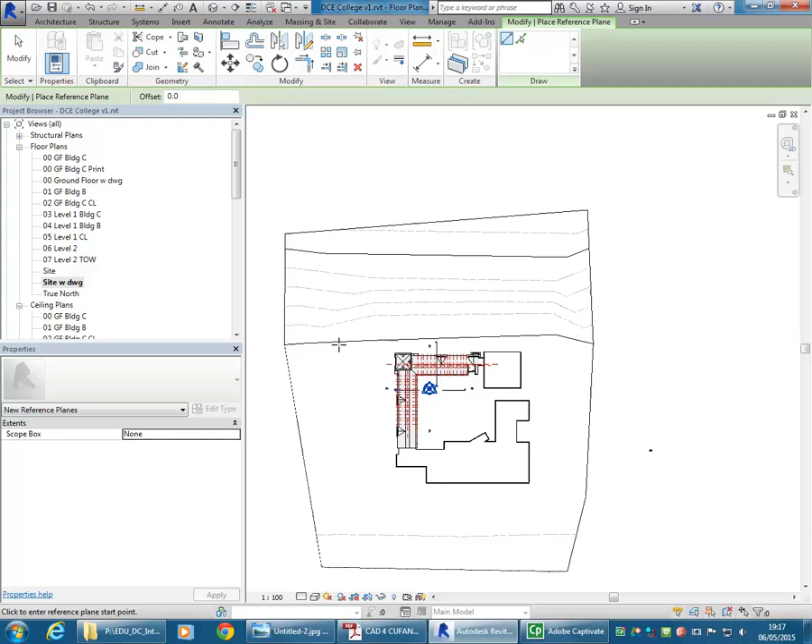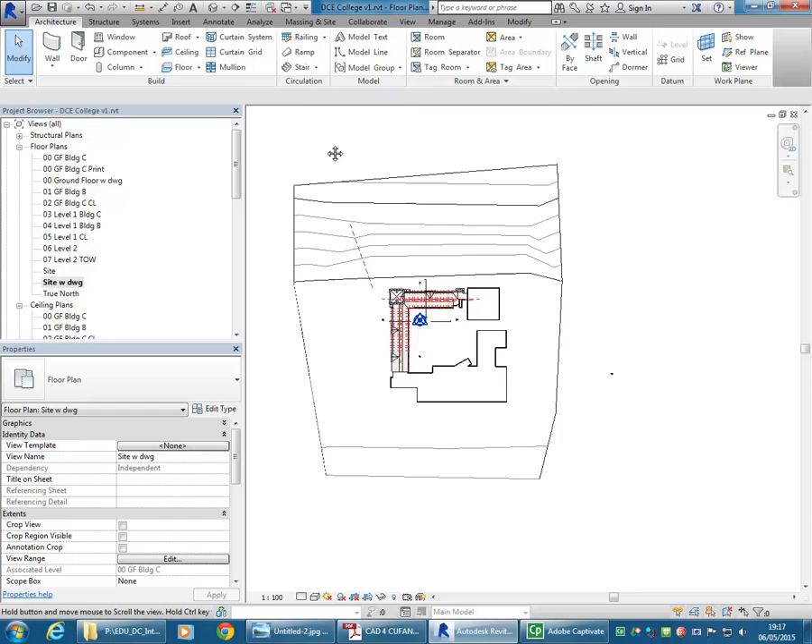So if you want to, you can go and get a Google Earth or Street View or just a Google Maps snapshot and, if you bring in a satellite image, work out exactly where true north is. I know though where it is, so I'm just going to do it manually. So I'm going to draw a reference plane to mark where I think north is, which is, as I said, pretty close to being vertical but slightly to the left of that. So it's about there, I think. And I'll show you later, when you're doing your proposal, maybe how to get a satellite image in. But if you want to have a look at the videos I've done for the Andrew Boy Charlton Pool, it's got it all in there as well.

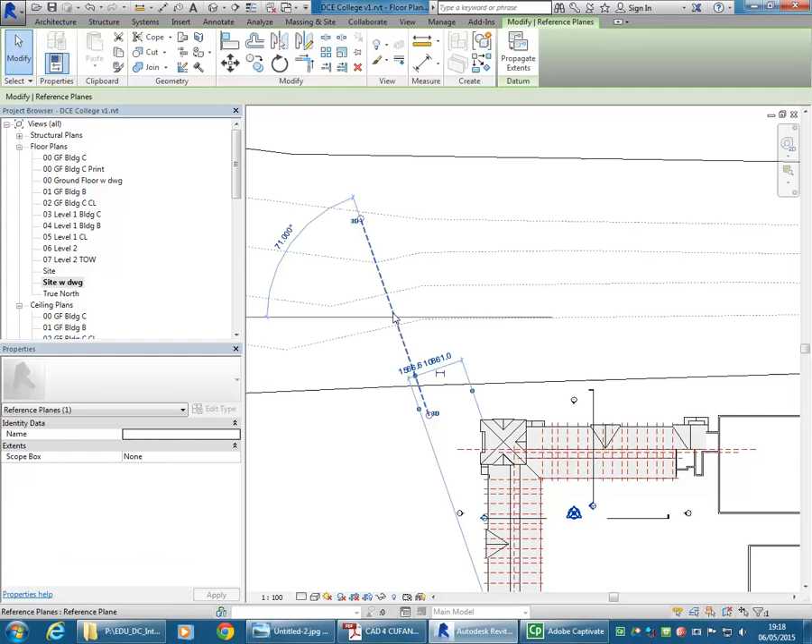And it's a good thing to know about. Getting accurate sun lighting is one of the main reasons for using a computer to do your drawings rather than doing it by hand, where people, honestly, just make it up quite often. So if you can get an accurate sun, it's a good thing. So this is the direction I want north to be, following that reference plane. And then going to the manage tab, and then in project location, at the bottom you have the option there to choose rotate true north.

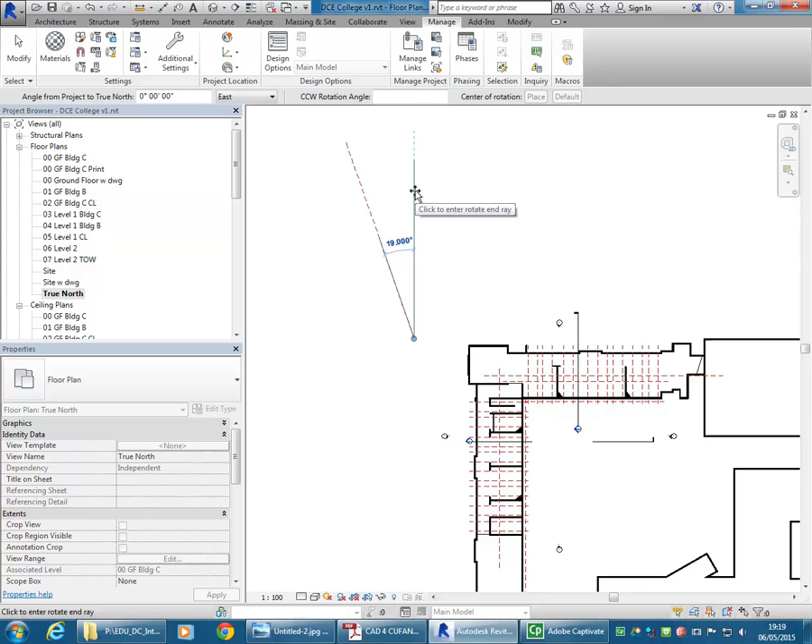And of course I'm not in a true north view. That's the first thing. So I've opened up the wrong site plan. I need to open up my true north view, and if you've ever wondered what that's for, it's there so you can set true north. So using the same option there, rotate true north, I'm just going to drag that base point onto my reference plane, and then snap my angle line onto that reference plane to begin with, and then bring it around so that my new angle is vertical. So at 90 degrees, in other words.

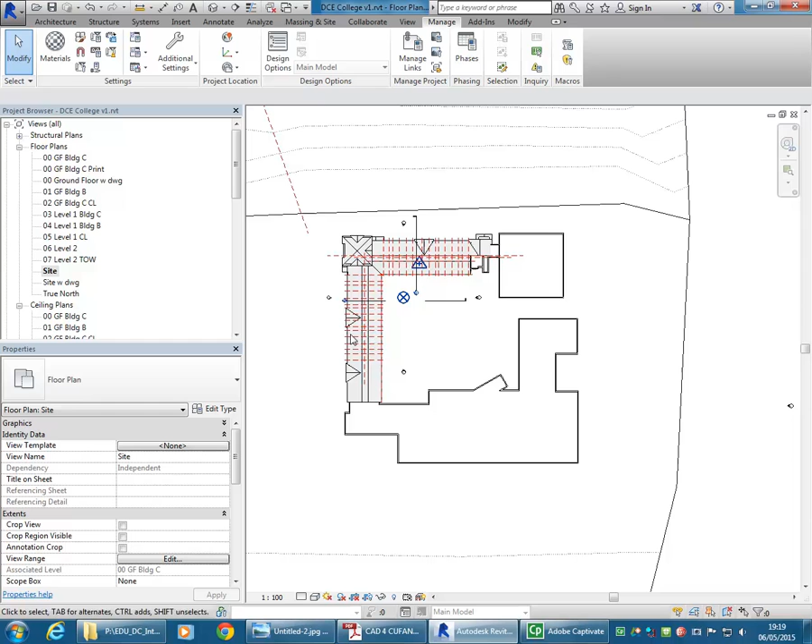So that reference plane should be now perfectly vertical. The building's rotated. But if I go and look in any of the other views that are not true north views, they'll all be at their original orientation. And that's how you want it to be. You don't want to have the whole building always oriented to true north, because it takes up more room on the sheet apart from anything else, and also means everything is, of course, at an angle.

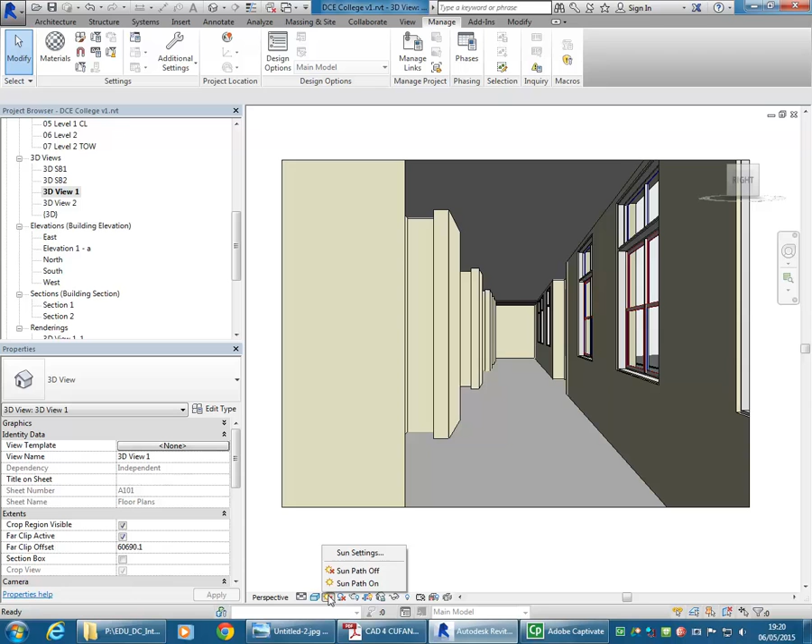So then, if I go and open up a perspective that I want to render, to use that new sun direction, you need to go to sun settings on the view control bar, go to still. So with lighting, it uses an angle that you type in, and if you sit down and work it out, you can type in the sun's angle, but no one wants to do that. So instead, if you choose still, it'll use your location and the date and time to set the sun in combination with the true north direction that you've set.

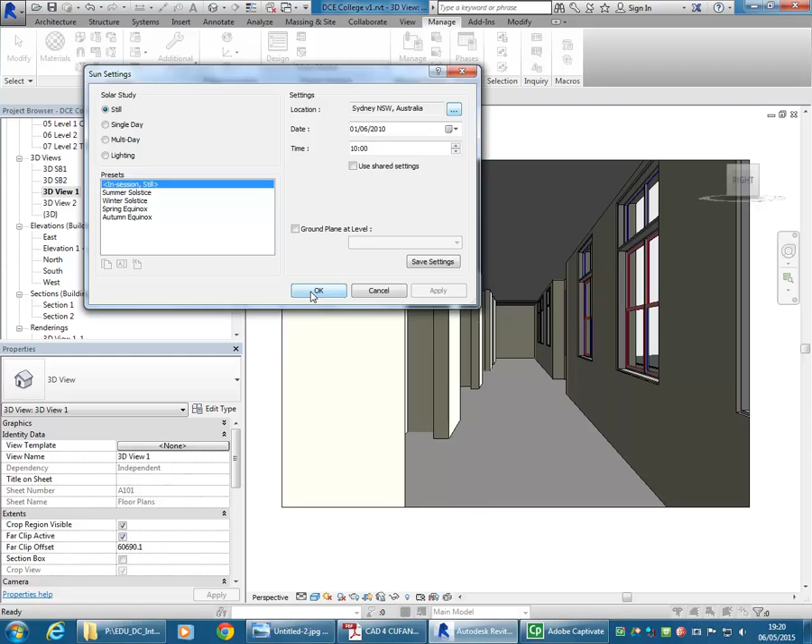Now, I can't really tell yet, well, I can get some indication actually if I click apply what the sun's doing there, but to get a better indication, I'm going to click OK, turn shadows on, and now I can see really clearly what the sun's doing. Back to sun settings, and if you're still not totally au fait with the way the sun changes throughout the year, this is a really good way of working it all out.

So if I go to December, and that's not December, sorry. Well, it's close enough anyway. So the end of December is roughly the summer solstice. And so in summer, the sun is very high in the sky, generally. It rises early in the day. By midday, it's almost directly overhead, so you'll get some sun coming through the windows, but not a whole lot, because it's very high in the sky.

And it sets late in the day, and by that time we won't get any sun coming through these windows. So summer, even though you might think it's going to give you lots of sun, actually usually gives you the worst sun lighting for your renders. Spring, so at the equinox, which is around the 22nd, we'll get the sun at more of an angle. And again, the sun rises a little bit later in the day, and sometimes that can actually give you some pretty decent angles for your sun, and also the colour is important. It gives you more reddish tones at sunrise and sunset, and then more blue and cyan tones in the middle of the day.

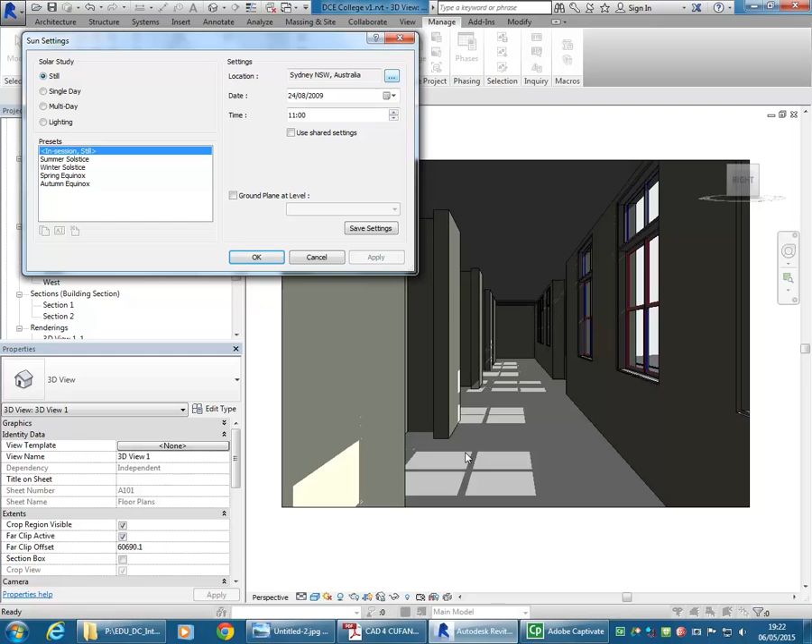Winter, so the 22nd June, which is the winter solstice, you'll get really steep angles, so we're getting it coming through there, not quite horizontal, but pretty close to it. So you're going to get lots of sun, and so that way, once you get used to that, you can use the date to control the angle of your sun, and you can position it really accurately just by fine-tuning that. And with these buildings, both of them, you should be able to get a lot of natural light through those windows. So going back to render now, I might set a little bit high quality.

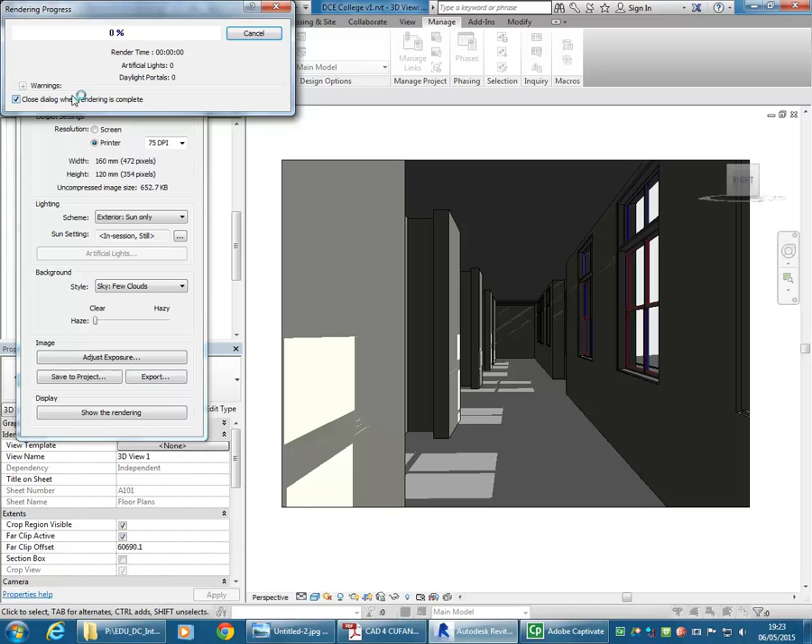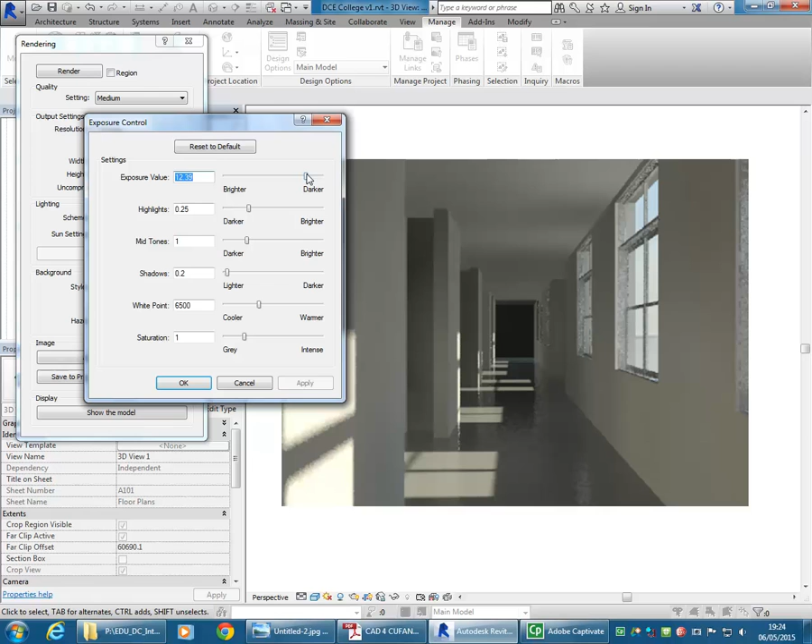Okay, so if you remember, I've been encouraging you to set up lights in your existing building models, but notice I haven't put a requirement for artificial lighting for this first project. You can do it all just with natural lighting. So there we are, I've got a render with natural lighting that's good enough. I'd probably try and do it on high quality, but otherwise good enough. And using exposure there, I can make that brighter so that it's bright enough to see that space.

Again, save the project. So that's my new view saved, and I can go and place that on a sheet just like any of the others. So that's it. That's hopefully going to cover all those view types you need for this first project, and also give you a good setup to start looking at for your design project, because you can reuse a lot of those views as you start putting your design in,

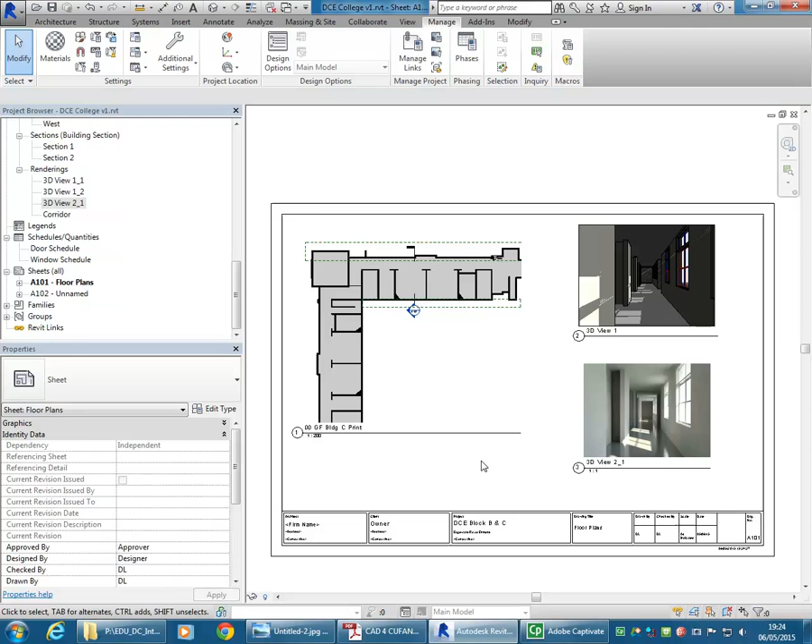and you know, it should give you clean graphics and again a good setup for the existing elements, so that when you put your design in, the elements that you're designing for your proposal should start to look different to the existing things. So you want simplified graphics, black for your cut elements for existing, but then make sure you put hatches and colours in for your new elements that you're designing. So let me know if there's anything else you're not sure about with your view setup, but hopefully it should be pretty basic setup for the views. Don't try and make it too complicated.